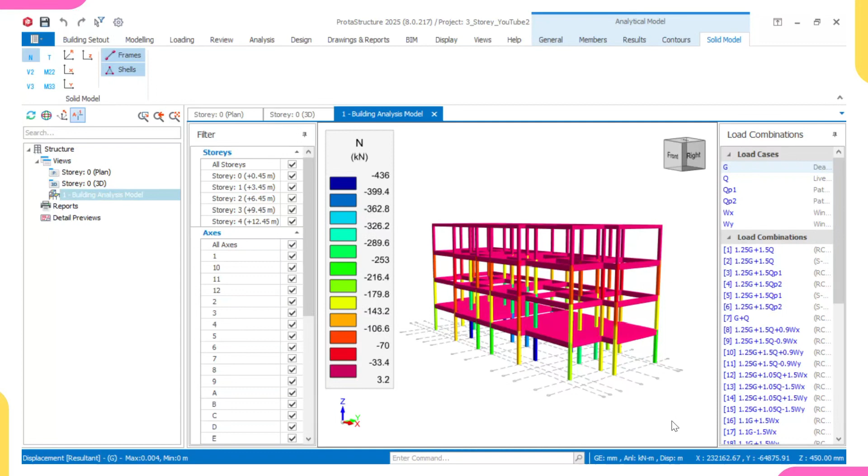When it comes to structural design, one of the most important decisions an engineer must make is the choice of foundation. For this particular three-story residential building, the soil condition was weak, and using pad footing would have meant that the load was not evenly distributed into the soil. That's why I opted for a beam raft foundation, a system designed to spread the load uniformly and ensure safety and stability.

But choosing the right foundation is only the first step. What truly matters is how you detail and position the reinforcements, because beam raft foundation is completely different from conventional superstructure slab. The placement, the arrangement, and even the philosophy behind it must be carefully considered.

In this video, I take you step by step through the complete slab detailing of a beam raft foundation from start to finish. I explain not just what to do, but also why it should be done that way. By the end, you will have a full understanding of how to approach, detail, and execute a beam raft foundation properly. If you ever want clarity on raft foundation reinforcement, this video will give you the professional insight you need.

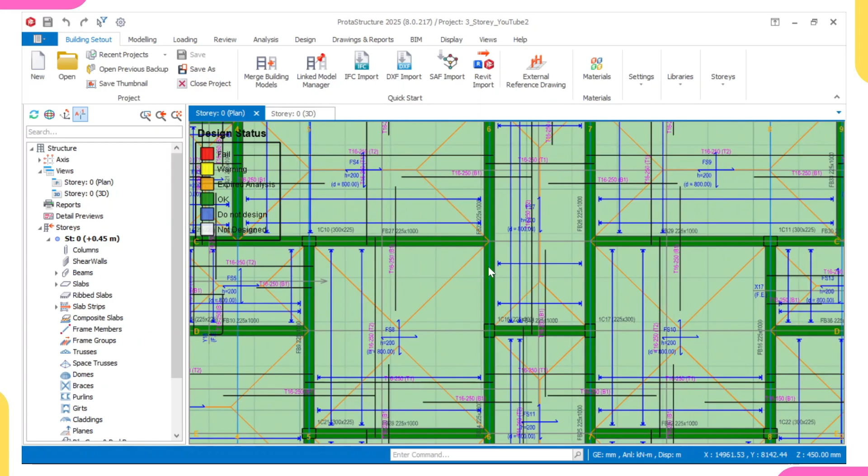So the unique thing about this beam raft foundation: in our normal slab, look at this, we'll be having this as top reinforcement. But if you see in this foundation slab, ProtaStructure is giving it to us as bottom reinforcement. It is correct. Let's also check. Look at this one, it's giving us bottom reinforcement. What we normally have in our conventional slab as bottom reinforcement, we are now having as top reinforcement. Let's check again, see, this top one is now bottom reinforcement once it comes to beam raft foundation.

Let me go over to story one so you can see what I'm explaining. So right now I'm in story one. This is my story one, and if you see, this is my staircase region, that's why the area is void. So look at it, it is on top, T1. Look at it, it is B1, that's bottom. It is T1, top. It is T again, top. Here, it is not B. But once it comes to foundation, it is different.

I will explain the reason for this once I enter detailing proper. Even if you go to beam, it is also like that. In beam, our hogging moment is no longer at the top, but now at the bottom. But I'll still explain all this once we enter detailing.

So right now, let's go over to AutoCAD. Coming over to AutoCAD, this is the foundation detailing that we got from ProtaStructure. But like I've always said, you can't print this and submit it to site. If they work with this, they will really get confused, and they will misinterpret what you have done. And once they misinterpret what you have done, this can result in building collapse, because they will do rubbish on site, because this is not readable. They will not understand this.

So we'll be using a template called Stonebridge detailing template. This template will help us achieve a neat and well detailed drawing. Also, coming over to beam, if you see, you won't even know the difference between our reinforcement and our beam line. But in a normal sense, reinforcement should be thicker. Before, we just come over and make it 0.3. Look at it, it is not thicker.

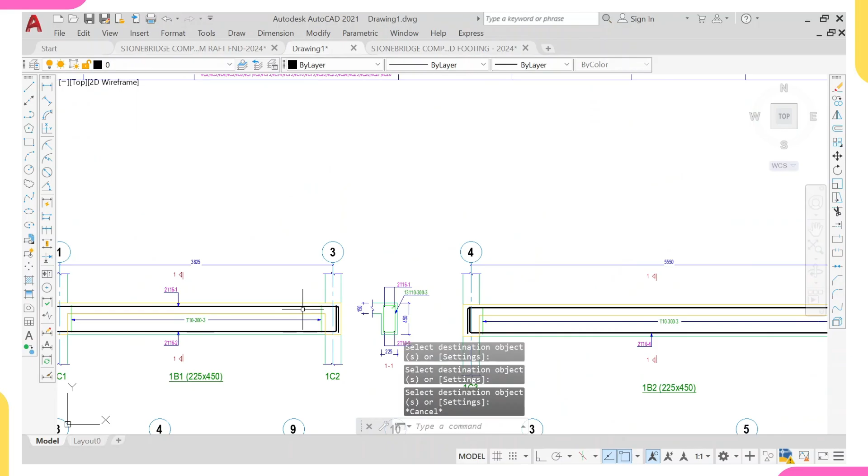Then we'll now do MA, that's to match property, then we'll start matching property. So this is how it has been done before, so that once somebody gets your drawing, it will be readable and clear and neat. But let me do Ctrl Z, that's to undo, because this is not what we'll be doing now.

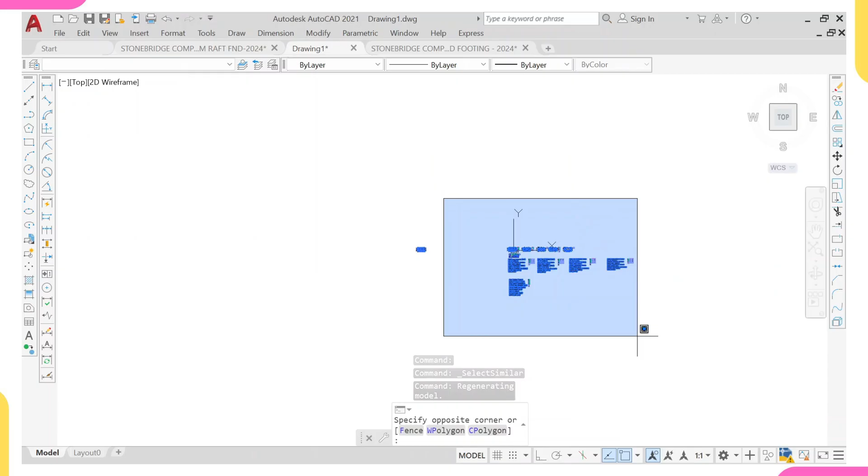So I will now right click and click on select similar. If I click on select similar, you see everything has been selected. But if you zoom out, you see some things are also selected here, so you hold your shift key to deselect these ones - yeah, they have been deselected now. I'll now type E, enter - E is for erase. So now I'm having a neater drawing.

What I'll do is still delete these ones because I don't also need these. So I'll still delete them - I'll also right click on select similar. Yes, I'll right click on select similar.

I think this will be the last thing we'll be deleting. Then I'll zoom out, hold my shift key, and deselect these ones. So right now I'm having a very clean and neat drawing.

So what I'll be doing now is to copy this drawing and paste it into the Stonebridge detailing template. I'll do Control C to copy, then move into this new interface, which is our Stonebridge detailing template that we created in our first video. I'll come over to this point and do Control V to paste it. So this is what I'm having right now.

Then I'll come down to this point and get a sample from this Stonebridge detailing template. That's why I say you should get this template, because you always need it. So I'll do CO, enter, to copy this sample, place it at this point, and then escape.

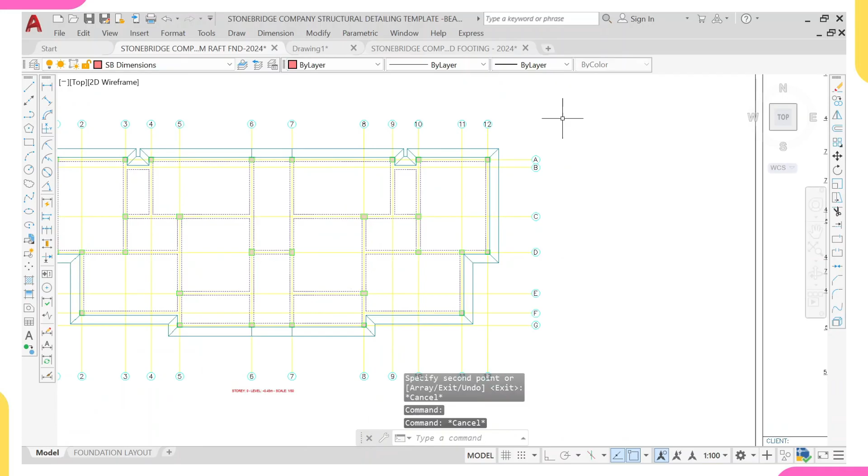So what I will do now is match the properties of everything here to this template. For example, this is our beam line. If you check the layer, it shows beam line by layer, by layer. But if I come over to the Stonebridge detailing template and click on it, it shows NLNG beams, color 8, continuous, and 0.2.

The reason you match the properties of everything here to this is because even if you work with this now and still print it, it won't be readable. For example, this thing is just by layer, there is no line width, so if you print it, it will be faint. But the one Stonebridge gave us has a line width of 0.2, so if you print it, it will be bold.

Let's check the line width of this. If you see this text, it's by layer, meaning the line width is 0. Let's also check the line width of this one, also 0. That means if you print this, it won't be readable. People won't be able to understand your drawing. That's why we're advising you to get this Stonebridge detailing template, because everything has been done automatically.

So I'll try to match the properties of everything here to this. I'll come over to beam. What is the property of my beam? If you check, it is NLNG beams, color 8, continuous, and 0.2. So I'll come to this point, click on it, right click, then click on select similar, and then come over to change the layer.

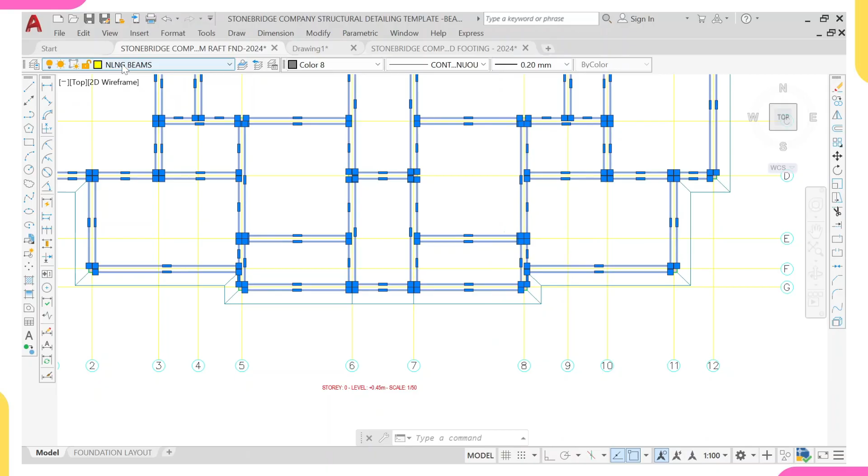So I'll move over to N. Look at it here, we go up. Remember, we said it is in color 8, color 8. Then here it is continuous, you click on continuous. And here it is 0.2. This is it. You must not just change only this layer, change these ones too. I'll escape.

So this is what I'm having now, it's now looking like this. Then I'll come over to this cantilever slab and check the layer. It is in NLNG concrete slab, and it is by layer, then 0.18. I'll escape and then come over and click on this.

I'll right click, select similar, then click on this to change the layer, that's NLNG. We need to go up. Look at it, NLNG concrete slab. Here we have it as by layer, and here also by layer, but here we have it as 0.18. Please make sure you change this to 0.18, because if you don't, it will be faint when printed.

So another thing to notice is that toe slab that we included in ProtaStructure to counter overburden pressure.

If you have not watched the design video, go and watch it so you understand the reason behind this toe slab. It was to counter the overburden pressure. Once the load comes to this column, we spread its load around this slab, and then this slab will distribute the load coming to the soil evenly, using this high surface area.

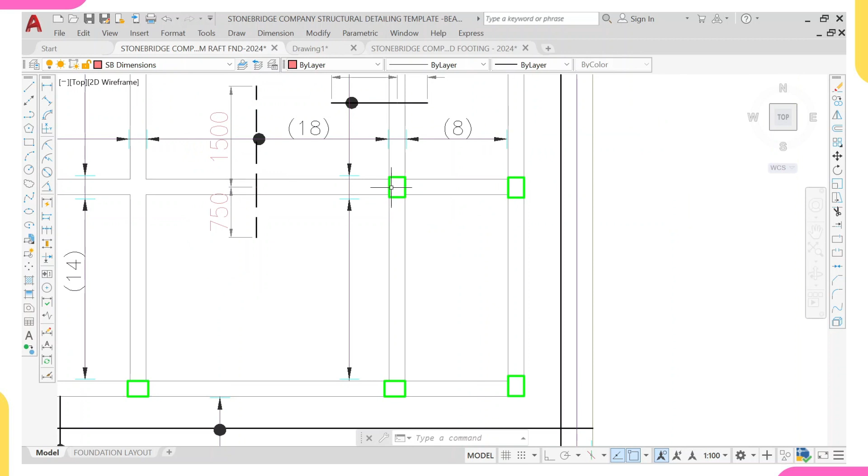But coming to this point, these perimeter columns will only spread their load to this slab in this direction. So if you check the surface area where they are spreading their load, it's not much, meaning the load will not really be spread evenly. That means we'll be having a very high punch here. So to counter that high punch, we will now introduce this toe slab.

This is just a hint of what I explained in that design video. If you want to know more about it, go and watch the video where I did the design of this beam and slab foundation, because I explained it there very well. The load coming to this need to be spread evenly, that's why we included this toe slab. If you don't, the load won't spread evenly, and if you design it that way, it will surely fail around these perimeter columns. Why? Because the load is not being spread evenly. You can go and watch the video to learn more.

So what I wanted to show is that all these cantilever lines are not here. So I will be deleting them one after the other, coming to delete and delete and delete. I'll pause this video and delete everything fast, so I won't waste time.

Right now, everything has been deleted, so you're no longer seeing those cantilever lines. The next thing is that there is no grid line here, because I did not use grid lines here. So I'll come and delete all my grid lines, so I'll have space while doing my detailing. That's the reason why this grid line was being deleted, so there will be space while doing my detailing. So I will delete this.

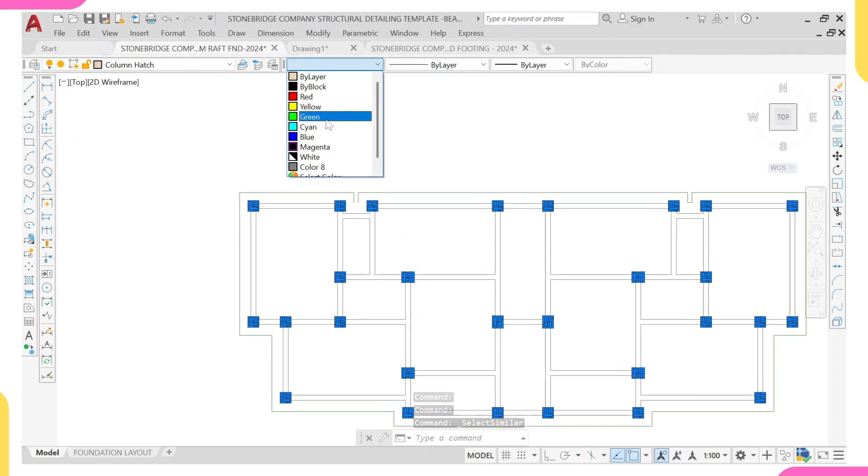After this stage, next thing is that these column colors are blue in color. So what I'll do is come over here, click on this, click on select similar. Once everything has been selected, I'll click on green, select this green color, so they will be green in color. Let me escape, I made a mistake. Let me copy this, CO, enter. Let me copy this and place it here.

I mistakenly deleted it. So next thing we'll be doing now is to start our detailing proper, because everything is done here. I want to explain that thing I told you in ProtaStructure, that we will be always having our top reinforcement converted to a bottom reinforcement. Let me explain it.

I would like to explain using a diagram. Let me go and import that diagram and explain using this. So this is my slab, then this is my beam, this is my beam, this is my beam. It's just like this is one of the slab details that I have done.

In a normal slab, we used to have top reinforcement. Look at it, this is the top reinforcement, and this is the top reinforcement, that's in a normal slab. Our top reinforcement looks like this, because the bending moment in a normal slab will go like this.

It will go like this. Then here it will go up, come down, go up, come down. So for that moment, we used to provide this top reinforcement to counter those moments.

But look at, this is a foundation beam. If you can see, this is our beam depth, and this is our beam depth. And if you see, it has changed. At here, we're having it to be at the top. Then we're having a bottom bar, which is our main reinforcement throughout the whole slab.

Why, if you come to this foundation beam, look at how it looks. This top bar is running throughout the whole slab. Why we are now having this bottom bars to counter the moment. In this case, look at how the moment is, and the moment it will go up. Once you go up, it comes down and you go up again. So this moment coming down here, don't worry, let me explain it.

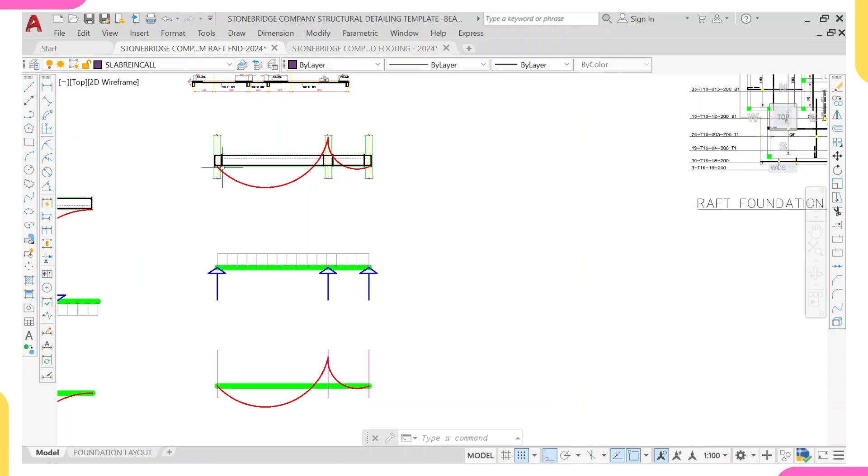So look at this is the free body diagram. So from here now, I can say that I'm having load acting on top of this slab. So look at, these are the loads. These are the loads. Then these are my beams. This is my beam, this is my beam, this is my beam. So this beam now is acting as a support, and also as a support.

Remember, if once this UDL, that's uniform distribution load, is acting on this beam, the bending moment diagram will look like this. Yeah, this is just normal bending moment diagram. Once you're having this, the bending moment will start from 0, then it will now go up. You are having hogging moment, then sagging moment, then it will now terminate at 0.

Then if we are now providing reinforcement, we will provide our main reinforcement at the bottom. Yes, we'll provide our main reinforcement at the bottom. Then we'll now provide top reinforcement to counter this moment. That's the top reinforcement you are seeing here. We now provide top reinforcement. That's this top reinforcement you are seeing here. And also that's this top reinforcement you are seeing here. So we now provide top reinforcement to counter this moment.

And then bottom reinforcement. Remember, just this top reinforcement will only occur at the point where you are having your beam. Yeah, it will only occur at the point where you are having your beam. So for that reason, that's why we do only place this top reinforcement in our beam zones. Look at it, in our beam zones, yeah.

But bottom reinforcement, it's just only here that bottom reinforcement will not be really needed. But if you look at it, it will be very small. So for that reason, that's why we now decide to place our reinforcement throughout the whole bottom slab.

That's why you used to have something like this, but then turn over to the foundation beam. Hope you understand this: our live load is acting downwards. This is our beam, these are our supports, and this is how our bending moment diagram will look like.

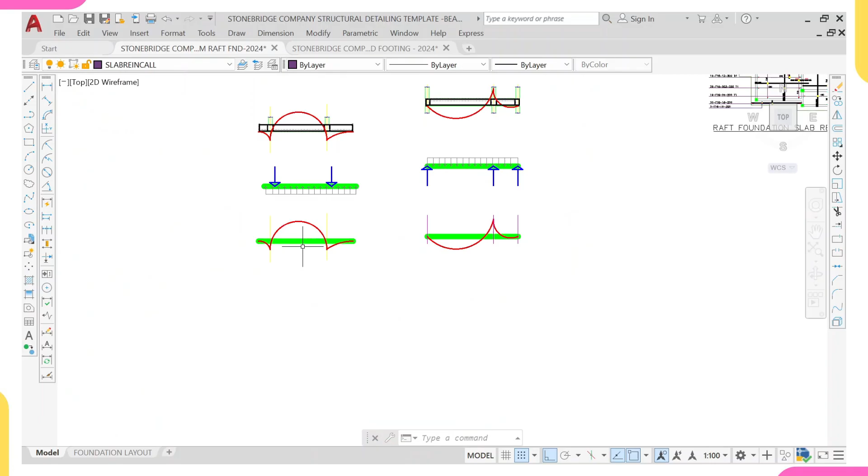Then coming over to our foundation. So this is our foundation, and this is our foundation. This is my column, this is also my column. Then this is now my slab, this is now my slab.

So this column now is acting downwards, this column is acting downwards. That's why you are seeing this, like load transfer in the column.

The beams, the floor, the slab will transfer its load to the beam. Then the beam will transfer to the column. The column will transfer to the foundation. Then the foundation will transfer to the soil. So look at it, the load is transferring to this foundation slab. This column now is transferring its load to this foundation slab.

So if you see now, it will punch here. This is why we are having this moment here, because it will cause something like a punch here and also a punch here. Then don't forget, we are having soil beneath here, we are having soil here.

So this soil now, look at it here, is acting as our UDL. This soil is acting as our UDL, and this soil now tends to oppose the load coming from this column, thereby pulling this slab upward. Look at it, it will pull it upward. Then once it tries to pull it upward, we'll now be having moment at the top.

We'll now be having moment at the top. In the case of a normal slab, our load, which is live load—that's human beings and all these things—they are acting downwards. While in terms of foundation, the soil is acting upward. So the soil, look at this slab, the soil will tend to pull it up. Yeah, not tend to—the soil will pull it up.

Then why will the column now cause a punch here, a punch here? Remember, in this one it is our beam that is pulling this thing up, pulling this up, and that's why we are having this hogging moment here. But in this case, the column is pulling it downwards, and then our soil will now pull here, up.

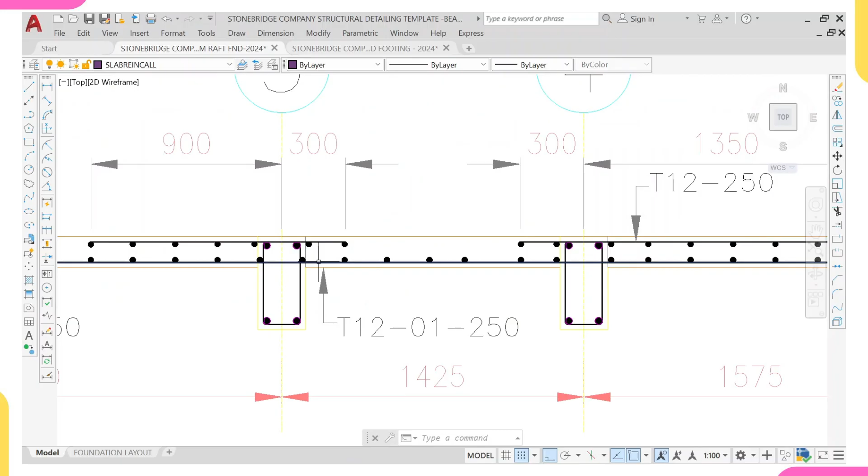For example, if I'm having this here now, it's just the same thing—just interchange these two things once it comes to the foundation slab. Just interchange both of them for the foundation slab, because of this change in moment.

I hope you understood this, as I explained. The soil is acting upward, then our column is pulling our load downward. So for that reason, this is how our bending moment diagram will look like. The soil will try to pull the load upward, while the column will try to pull this slab downward.

That means here we'll be having moment, so we'll provide bottom reinforcement to counter this moment, and also our main reinforcement, which will now run throughout the whole slab, the top reinforcement. I hope you have understood this.

But before I continue, I would like to say something—there's one mistake I made during the course of this video. I could have started from the beginning, but it would be time consuming, so I decided to leave it like this, but make the correction before I reach the point where I made that error.

So the correction I want to make is that, based on what I have explained now, this will now be our top reinforcement. This top reinforcement will be running across the whole slab.

So you know that in normal slab, which is superstructure, we used to call these B1, B2, bottom reinforcement. But this is a foundation slab, so it has changed. It won't be called B1 again, it will be called T1. Let me trace this one. If you trace it, look at it, it is T1. That's this reinforcement. And if you trace this reinforcement, it will be T2, meaning it is top reinforcement.

But during the course of this video, due to the fact I've done a lot of slab design for superstructure, I was calling this B2, B1. During the course of this video, I just want to correct it right now. So if I start making that mistake, you know that is a mistake.

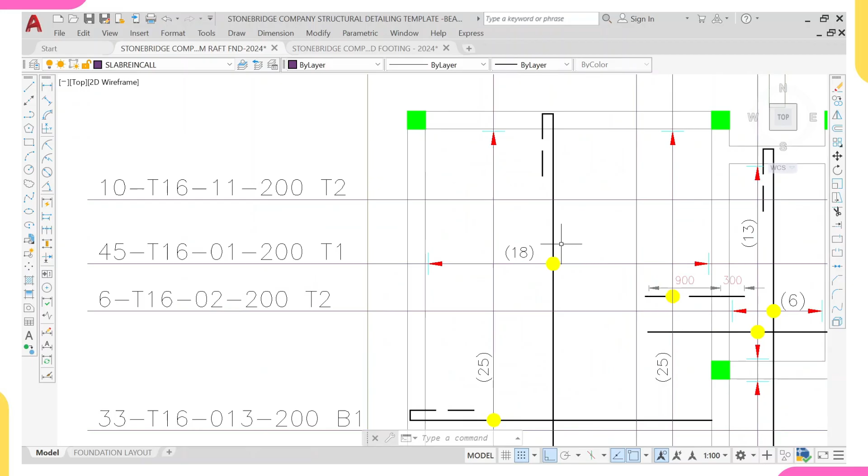Like I called this, look at this, I've detailed everything here. This is how it looks, let me show you. This is what you get by the end of this video. This is what you'll be able to achieve by the end of this video, because I've done this whole thing. This is what you're going to learn by the end of this video, how to start from this and arrive at this.

I just want to show you one mistake I made. For example, this now will be T1, but in a normal superstructure slab we call this B1 or B2, but in foundation we call it T. Yes, T. Look at it, T. Let's check it. Look at it, T. Yeah, T. I've done the correction. It's just that during the course of the video, I'll be calling it B1, B2, so you know that it is a mistake.

The reason is because of this thing I've explained. Look at it, there is an interchange. At this point, this bottom reinforcement ran through this whole slab, but coming over to this point, it is the top reinforcement that ran through the whole slab. So that's why this thing is like this. Coming over to this point, this thing now is my T, no longer B. In foundation, it is T, not B. Please understand this.

Another thing I would like to explain is this. You know, during the course of the video, I was calling it lapping length. Yes, it is called lapping length, but normally this is called bottom bar. Bottom bar. Let me show you the meaning of this.

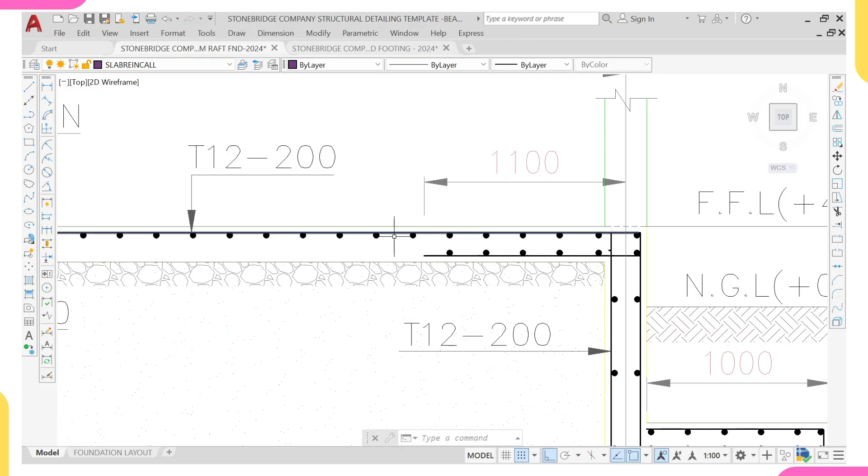Let me come and show you. Look at it here, is this the thing that we're having here? Look at it, have you seen it? Look at it here, is this? Then it will now come and curve like this. That's this. Yes, that's this, look at it. Is this bar? Look at it here. But I kept on calling it wrapping length so that you know what it means.

So look at this bar now. If you are seeing this, this is the top reinforcement, top reinforcement. Then this is my sidebar. Then this is my bottom reinforcement. Now come over to the section and look at how it looks. Top reinforcement, top reinforcement. Then I will be having a sidebar here. Then this is that bottom reinforcement, which you can also call wrapping length or bottom reinforcement. Just call it bottom reinforcement.

That's it. So with this now, let's continue with this video. I believe you understood what I just explained. So right now, I'll start my detailing.

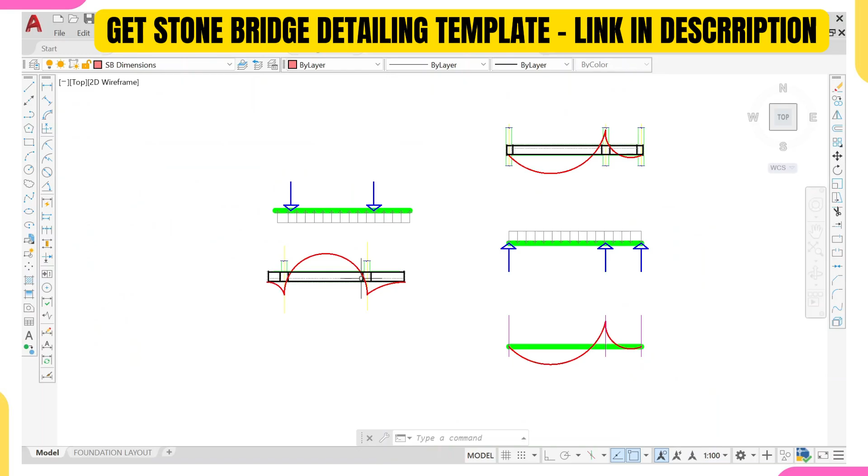As you can see, all these main bars, as in normal reinforcement for superstructure, all my bottom bars in this foundation beam will now be top bars because of what I've just explained. Because of the way the load is being transferred, the soil is trying to resist the load, so that's why we are having this. Once it comes to foundation, you'll see that my main reinforcement will be at the top. You will surely see top reinforcement throughout, it must be there. Then this bottom reinforcement will not be like the top reinforcement in superstructure. I don't know whether you understand what I just said, but let's go over to design.

So once it comes to detailing, you can detail by panel. Someone can decide to detail panel by panel, finishing one panel, then the next, and the next. Or you can just decide to detail everything at once. In the last video I did about detailing, I did it panel by panel, but in this video I'm no longer doing panel by panel, I'll just do everything at once. In case you want to learn how to do panel by panel, I've done a video on that.

So right now I want my reinforcement. I'll type L, enter, and turn on my ortho. I come over to this point and click, or I'll do Control F8. Once you do Control F8, your ortho will automatically turn on. So I'll do L, enter.

So I'll be having my main reinforcement run from here to here. Remember, we are not including here because this is a toe slab. Look at the way it looks like.

Let's go to the section we did in our last video. Look at this, the way it looks like - this thing is at the bottom, so we are not detailing it now. We are only detailing this top one. We will not detail this toe slab, these outer ones - they are called toe slab.

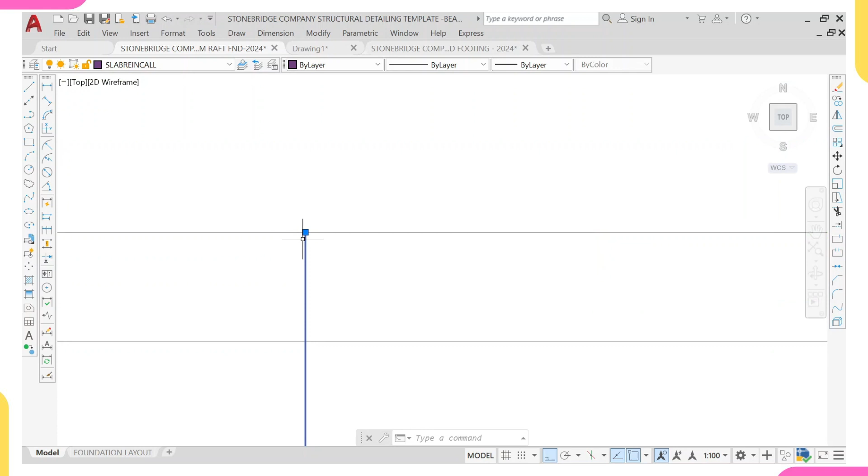So once I have this, remember my concrete cover - all that I have as my concrete cover. I used 35 as my concrete cover in slab detailing. So I use 35, then I'll put this thing downward by 35, that's my concrete cover. I'll do enter, then once I've done 35, I will now do L.

I'll come and do L, enter. So what I'll do now is, our slab depth is 200, so I'll do 200 minus my concrete cover which is 35 - this one is for the bottom - minus again 35 for the top one. So I'll now be having 130. I'll do 130, enter.

Once I've done 130, enter, then I'll now include my lap length. So what is my lap length? We are using diameter 16. Don't forget that your lap length is always 50 times the diameter of your rebar. So I'll do 50 times by 16 because we're using 16, so my lap length should be 800. I will just minimize, so I'll do 800, enter.

I will not escape, so this is what I'm having right now. I hope you understand - yes, this is what I'm having right now. So in this case I'll come, that's why I say you should get this template.

I'll come and match property, so I'll do MA enter. I'll come and match property again, this one - I'll escape and come again and match property. I'll match this, this one is my bottom reinforcement. So I'll do MA enter. So my bottom reinforcement should be like this, and this is my top reinforcement.

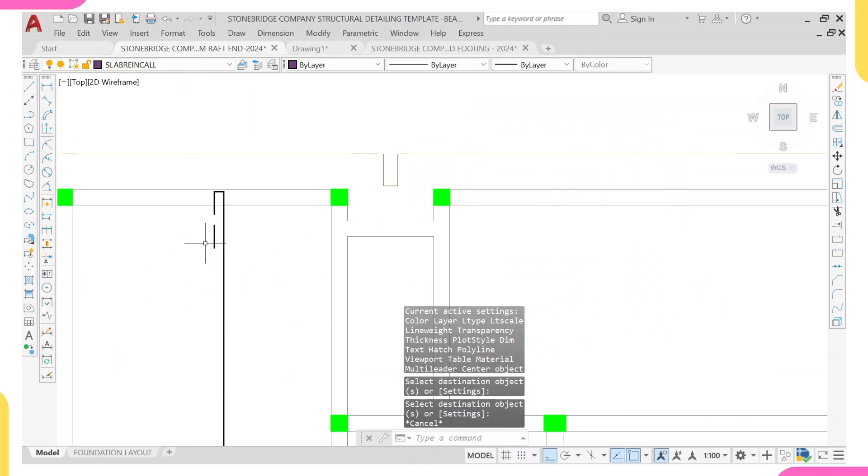This reinforcement, I have it running from here to here and also from here to here. Once it comes over this side, I'll not detail this side. After, I'll mirror whatever I have here to this side because everything is the same, so I won't detail here, I'll just mirror everything I have here to this side.

So this is what I said I'll be having. I'll do L enter to call out my rebar, run it from here, and drop it at this point. I'll escape. Remember our concrete cover, which is 35. I'll click 35 enter, and once I do that, this is what I have here.

Now I'll come over to this Stonebridge detailing template and copy this. I'll do CO enter to copy from this point, zoom out, and come and place it at this point. So I'm having it here.

So I'd like to change the color of this to red. You can decide to use any color of your choice, but I want to use red. I'll also come over and copy the one on this side.

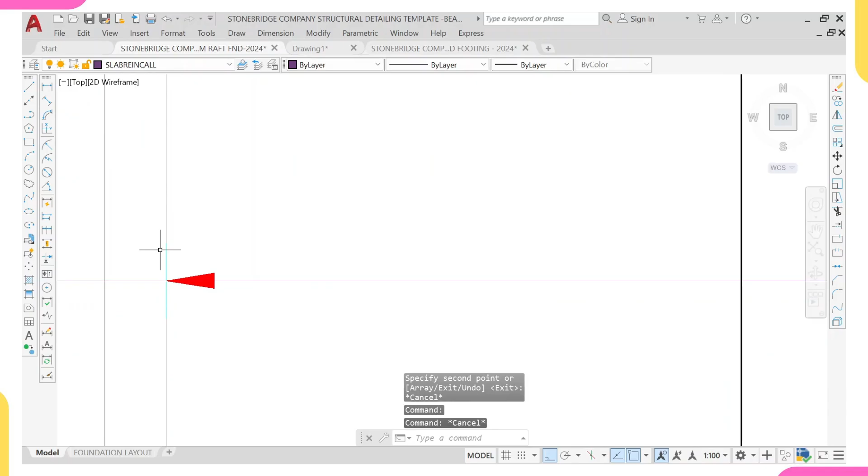I'll do CO enter, copy from here, and place it at this point. Once I place it, I'll also change the color of this to red. So I'm having this. Once I copy to this point, I'll mark this, do enter, and move it backward. That's my concrete cover, 35, enter. So this is what I'm having right now.

Then I'll also come and copy out my call out, which is my indicator. I'll do CO enter to copy my indicator from this point, and come and place it at this point. I'd like to change the color of my indicator to yellow. Yes, this is the color I want. So this is what I'm having right now.

Remember, I said this reinforcement will run from here. Let's copy this. I'll do CO enter, copy from the extreme, and trace it. I'll place it at this point - I forgot to place this one before.

I'll also copy this, do CO enter, copy from this point, and place it at this point. So what I'm having now is that this reinforcement will run from here to here, and also from this point to this point. That's what I'm having.

So I'll come right now and copy this. I'll do CO enter, copy from this point, then come and paste it - one here and also one here. So this is what I'm having right now.

So I'll also come again and copy another thing. I need this. I'll do CO enter, copy from this point, move it backwards, and paste it at this point. So this is what I'm having right now.

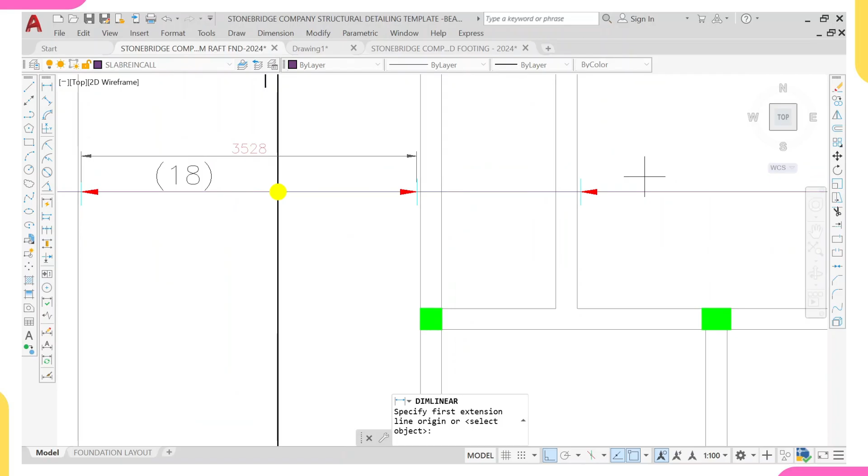Then at this point, next thing to do is get the number of reinforcement running from here to here. To get that, we need to know the dimension - what is the distance from this point to this point? I'll right click again, repeat linear, to get that distance. So I'll come and click on my calculator.

Before I click on my calculator, how are we going to get the number of reinforcement running from here to here? You do 3528 divided by the number of your spacing - you divide it by the spacing of your reinforcement.

So let's go and see what ProtaStructure gave us as our spacing. I'll come over to this drawing that ProtaStructure gave us and zoom here. We're having TY16 at 250. So the spacing that ProtaStructure provided for us is 250, but I will not be using this 250.

The reason I will not be using this is I'll be using the spacing of 200. This is because I'm in an African country, and I know that the country I'm located in, which is Nigeria, tampers with quality a lot.

Remember we use T16. Their T16 now will be something like T15, T14, or even T13, so it's not enough. Also, we use the yield strength of 460, and the reinforcement that I will buy from the market might no longer be the yield strength of 460. It might just be something like 430 or even 420. So to counter these losses, I will decrease the spacing to 200. In fact, the general advice I'll give anybody is that once it comes to slab detailing, please use 200 millimeter spacing at least.

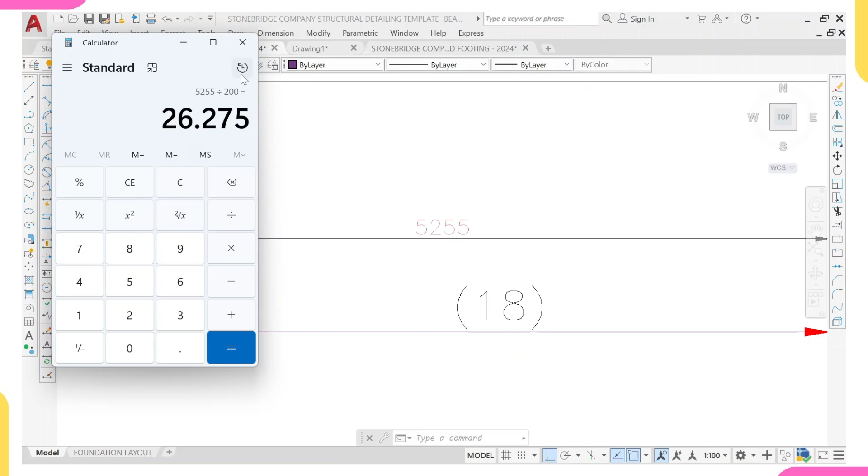Coming over to this point, I'll come over to my calculator again. I'm having 5255 divided by 200, so this is what I'm having, 26.27, so it will be 27. After this I'm not bringing on my calculator, I'll just be using the one I have here, you can press it in your own calculator. So I'll be having 27, I'll change this into 27. I hope you are following, I'll change it to 27. So this is what I'm having right now.

Coming over to this point, what I'll do now is 27 plus 18. So 27 plus 18 is 45. You can press it in your own calculator and check. So it's 45, I'll do 45.

This is not T12, it's T16. At T16, since this is my first bar, my bar mark will be 01. That's my first bar mark. This is 200, then this is B, B stands for bottom. I can start to use B1, anyone, B1 or B2. Once I come to my verticals it will be B1, then my horizontals will be B2. So that's what I want to do now. I don't want to include one way or two way slab.

So I'll come and click outside. Yes, so this is what I'm having right now. Then I've detailed this and this.

Next is that I'll copy this, next is for this one. But what I'll do is I'll just come over and copy this, copy this, and do CO, enter. I'll copy from the extreme from this point, then once I copy from this point, I'll just come and paste it at this point. Yes, so this is what I'm having.

But what I'll now do is take this thing backward, so it will just run from that place to this place. So I'll now create another reinforcement, L, enter. This one will be running from here. Okay, let me just extend it out first. So this will be running from this point to this point, that this bar will just run from here to here.

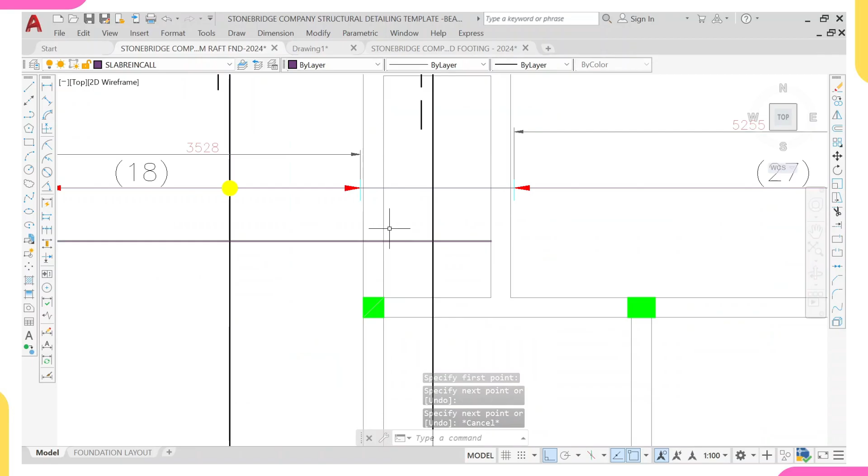So I'll come select this, CO, enter. I'll copy from this point and then place it at this point. Then escape, then do TR, enter, I'll trim off this. Yes, and then I'll come back again and copy this, do CO, enter, I'll copy it from this point. Once I copy from this point, I'll come and paste it at this point. Yeah, so this is what I'm having.

I'll come and copy this, the CO, enter. I'll copy this from here and then paste it at this point. Since this is big, I can just decide to scale it down a little bit.

Okay, let's just check the number of bars. So I'll click on my dimension. What is the number of bars running from here to here? I'm having it to be 1130, so I did 1130 divided by 200, and I'll be having 5.65. That means I'll be using 6, it will not be 6... so I'll do 6, yeah, 6. Then I'd like to delete all these dimensions because I don't need them again.

I'll do E, enter, since I don't need them again. Then I'll scale this down. I'll do SC to scale down, enter, select my base point, and scale it down by 0.75. Enter, so this is what I'm having right now.

Then I'll move it a little bit to this point. I also scale, but let me leave this one like this. So at this point, after this, I've gotten this.

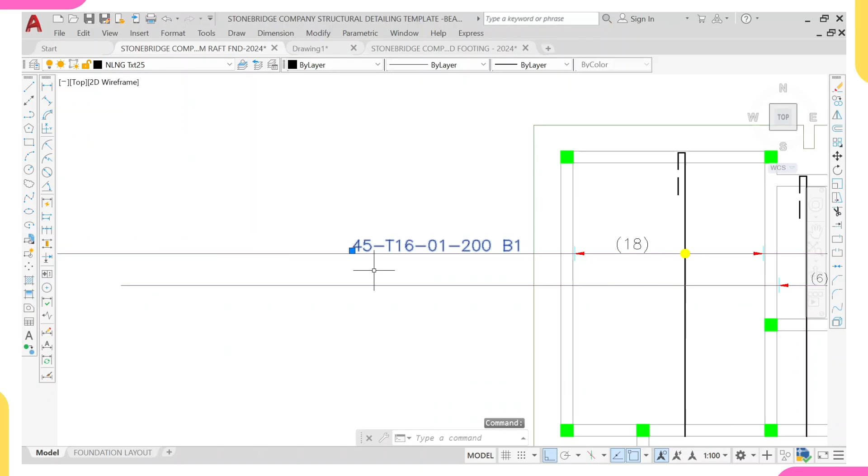What I'll do again is copy this. I'll do CO, enter, copy it from this point and place it at this point. Then I'll double click on this. I'm having 6, just 6, T16. This will be 02 at 200, B1 again, 1. So this is what I'm having right now.

So after this, remember I've detailed here, I've also detailed here, and I've detailed here. So the next thing is to detail this bottom part.

I'll do L, enter. I'll run it from here to here. Remember, you stop here because this is a toe slab. So I'll come and click on this, then take it back by 35, that's my concrete cover.

L, enter, that's my line. Take it back by 130, you can remember how we got 130. Enter, then take it back by 800, I hope you remember how we got 800. Enter, so this is what I'm having right now.

I'll then come and match property. I'll do MA, enter, to match my property. So this is what I'm having right now.

I'll escape again and come match this top reinforcement property. Sorry, not CO, MA enter, that's to match property. So I'll come over and match this property. So right now I'm having this.

This will run from here to here. So I'll do L, enter, starting from this point, and take it outwards. Escape.

So I'll try to bring this a little bit downwards. Yeah, I'll try to bring it a little bit downwards, so I'll try to have it here.

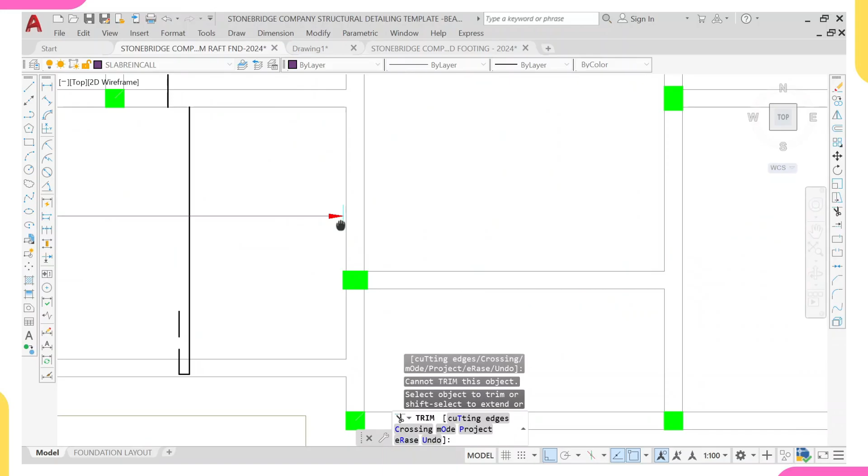Then I also like to come again and copy this. CO, enter. I'll copy this from this point, then come and paste it at this point.

Then right now I'll copy this again. CO, enter. I'll copy from here and paste it at this point.

Yes, I'm having this. Don't forget, I forgot to include our indicator. CO, enter. We'll copy this indicator from this point and include it at this point. I'll also come and include this indicator at this point, and then we'll check.

Okay, remember there's what is called lapping length, because these two reinforcements need to lap. Once this runs from here to here, it will lap with this, while once you come over from this point to this point, it will not lap with this. Then from this point to this point, it will not lap again. So right now, to include this, we must include the lapping length.

So lapping length, remember, we say it is 50 times the diameter, which is 50D. And our D here is 16, so 50D is 800. To include that, my lapping length, I'll do 800, enter. So at this point, once this laps with this, then once it's at this area, it will now come and lap with this. So this is what I'm having right now.

So I'll check the dimension to know what will be the number of reinforcement that will run through here. I'll check from here to here, so I'm having it to be 5103 divided by 200, which gives 25.5, so that will now be 26.

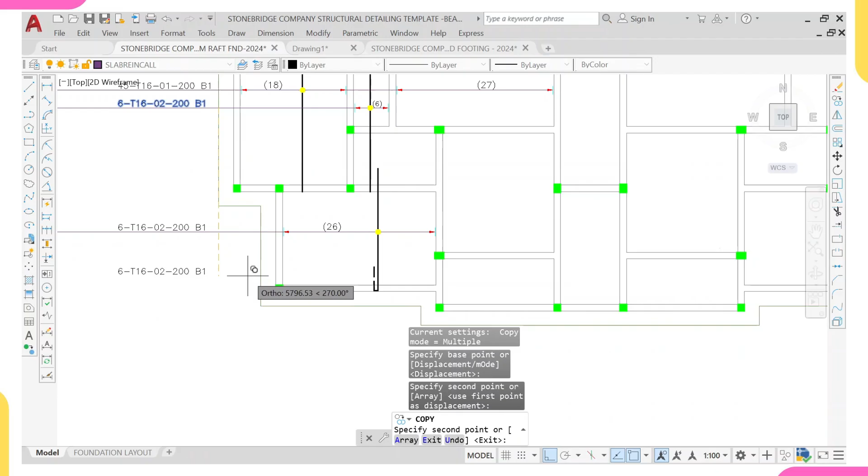So I'll come and double click on this, 26. So I'll delete 26. T16, this will now be 03, and this will be 200 B1. So it's okay with me.

Coming over, my next reinforcement will run from here downwards. So what I'll do is I'll come over and copy this. Do CO enter. I'll copy this and place it at this point. Then I'll highlight this and extend it downward to this point.

Then I will take it back 35, my concrete cover, enter. Then I'll escape, L, enter, to include my side bar, which is 130 millimeter, enter. Then I'll include my lapping length, which is 800, which is also serving as bottom bar.

So I'll click enter, then come and match property, MA, enter. Once I have MA, enter, I'll match this property with this. Then I'll escape, MA, enter, and match this property with this.

Then I will now L, enter. This will run from here to here. So I'll indicate that it's running from this point to this point, using this area. So I'll pick my indicator, CO, enter.

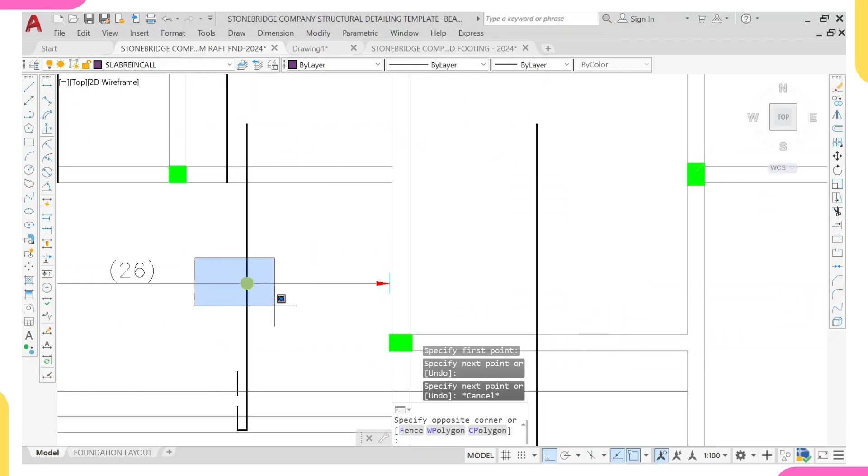My indicator, I'm having this as my indicator. I'll place it at this point. Remember, we're having a concrete cover of 35, so I'll take it back by 35, enter. Yes, this is what I'm having.

I'll come over to this point and select, CO, enter. I'll select this, copy it, and then place it at this point. Then next, I'll come and copy this, CO, enter. I'll copy this from this point and place it at this point. Yes, this is what I'm having right now.

Then I'll come and copy my rebar at this point to know the number of reinforcement running through here. I'll place it at this point. I'll escape, then click on my dimension to find out the number of reinforcements running from this point to this point. So I'm having it to be 3682.

So I'll escape, 3682 divided by 200, so I'm having 18.4, which will now be 19. You can press it in your calculator to verify 18.4. So I'll now be using 19.

Then I'll come over and copy this. I'll do CO, enter. I'll come over and copy this and place it at this point. Then remember, it's 19.

I'll double click on this. Yes, I'm having 19, T16. This will now be 04, 200 B1. So I'm okay.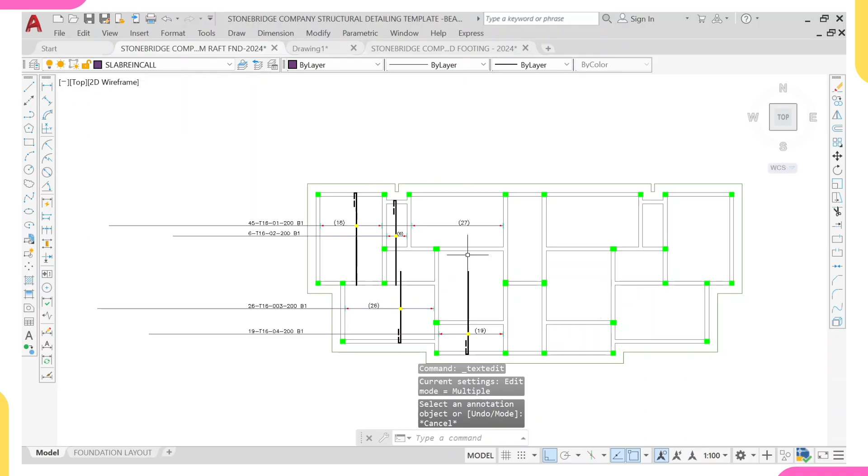If you can see, I've provided all my vertical bars. Next thing is to provide these bars, that's the horizontal bars. Yes, that will be the horizontal bars, and the horizontal bars will now be my T2.

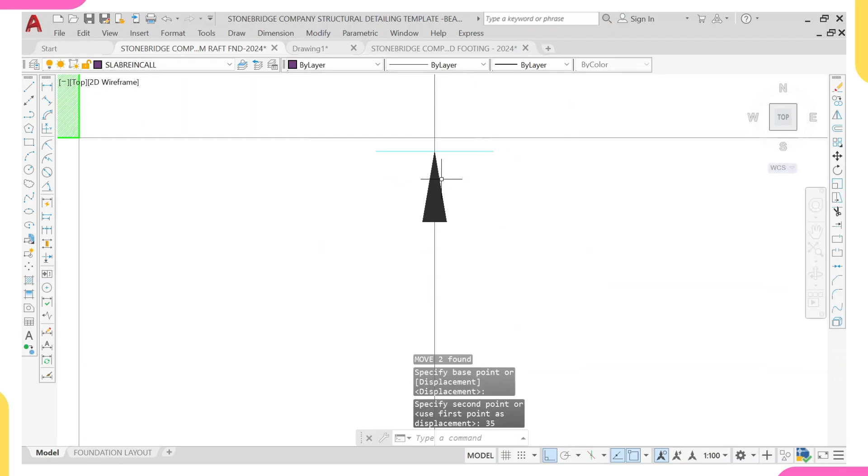That's to move it downward by 35, my concrete cover. So this is what I'm having right now. Then I'll copy this indicator, CO, enter, to copy this my indicator.

I'll copy this my indicator and place it at this point. Sorry, I don't copy this from the center. M, enter, so I'll place it at the center. So this is what I'm having right now.

I'll try to move this a little bit, move it away from this line. So I'll place it here. So this is what I'm having.

So let me come and pick up this from here. I'll do CO, enter. I'll copy from this point and come and place it at this, I'll like to place it here.

So I'll now check the number of reinforcement running from this point to this point. I'll come and click on my dimension, checking what's the dimension from this point to this point.

Let's zoom. I'm having it to be 4956. So I'm having it to be 4956 divided by 200, so I'm having it to be 25. I'll escape, I'm having it to be 25.

So I'll double click on this. I'm having it to be 25. So this is what I'm having it to be.

Then next thing, I forgot to change the color of this. Okay, let me just select it, and then I'll come over and change the color to red. Yes, this is what I want the color to look like.

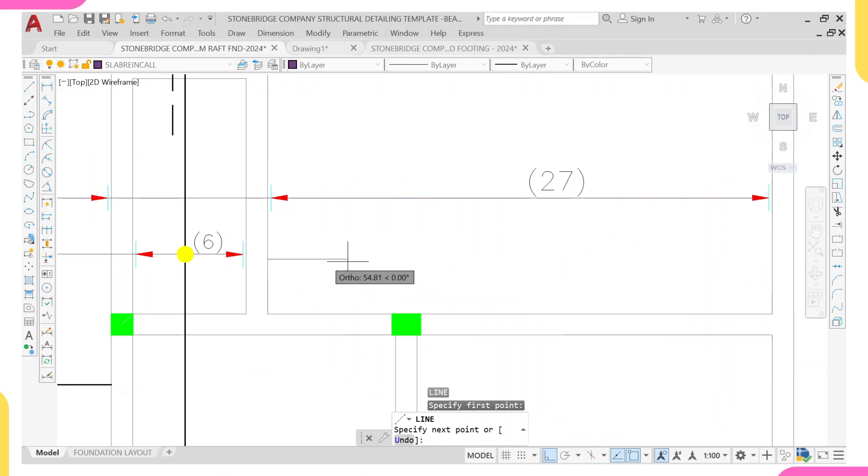So right now I'm through with this. Then I'd like another reinforcement to run like this. I'll do L, enter, I'd like to have another reinforcement running from this point to this point. Let me drop it at this point.

Remember, here is a slab, because this is foundation. So I'd like to have a reinforcement running from here to here, and I'd like that reinforcement to move into this slab.

That will be the lapping length, the lapping length of any reinforcement I will provide here. So I'd like to move by 800, which is the lapping length. I'll click on enter. Control Z.

So I'll click on this again. I'll extend it by 800, which will be my lapping length. I'll click on enter. So this is what I'm having.

I'll come and match property. I'll match property MA, enter. I'll match this property. So this reinforcement now, I'd like it to be running from, I'll type here, enter.

So it will be running from this point, running from this point upward. So I'll escape. I'll come and copy this.

I'll copy this, do CO, enter. I will trace this line downward. So I'll copy it from here and then come and place it at this point.

So I'll now do TR, enter, which is to trim out this. So I'll trim out this. So this is what I'm having right now.

I'll also come and copy this top one. I'll copy this top and do CO, enter. I'll copy from this point.

I'll copy and paste it here. I also forgot, I'll paste another one here. This one I should have pasted. So I'll copy this again, from here. Do CO, enter. Do CO, enter.

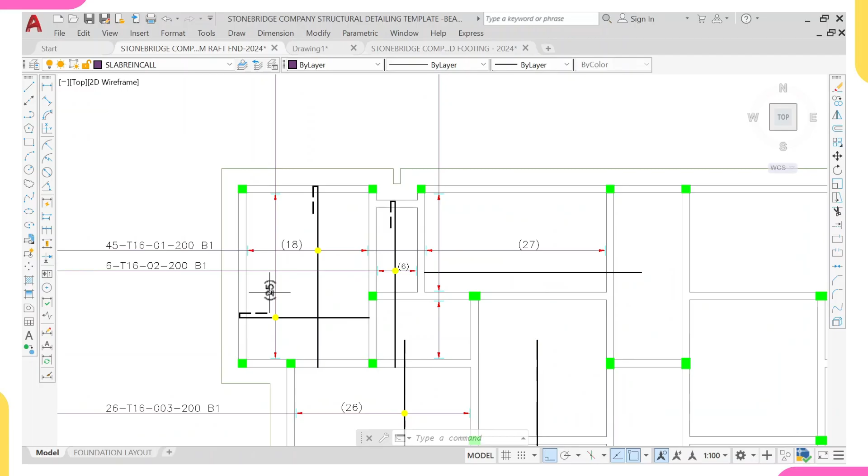I'll do CO, enter. I'll copy this from here and I would like to paste it at this point, and also at this point. Yeah, this is what I'm having. So I'll now check the dimension to know the length.

So I'm having that from this point to this point, from this point to this point, it's 1724. Then 1724. I'm having that from here to here is 2929. So I'll use my calculator, 2929 divided by 200.

So I'm having 14.6, so I'll be using 15. Yes, I will delete 15. So this is what I'm having.

Here it will be 1724. 1724 divided by 200, so I'm having it to be 8.6. That means we'll be using 9. So I'll delete 9.

So I'll come over. Since I don't need the dimensions again, I'll delete them and also delete them. Enter. So I'll come over to this point and copy one of this.

Yes, I'll come and copy one of this. CO, enter. I'll copy from this point and then I'll paste it at this point. Yes, at this point. I don't even call out this.

So I'm having this. So in this case, this one is what? 25. 25. So I'll double click on this. It is 25. I'll double click on this. I'm having it to be 25.

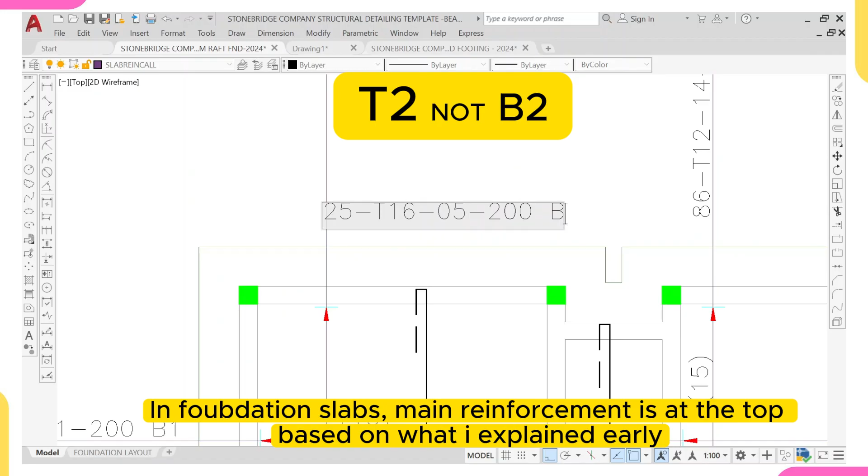T16. So what is my number? Oh, the last one I did was 4. So this will be 05, that's 0505. And this is 200. This will be my T2. Yes, T2. So this is what I'm having.

And then I'll come over to this one. So I'm having it to be 15 plus 9, which will give us 24. So I'm having it to be 24, T16, 06, 06, that's the bar mark, and this will be 2. So this is what I'm having right now.

Then remember I said another bar will run from here to here. Another bar will run here. I'll do L, enter, and indicate this bar. There will be a bar here from here to here.

Let me match the property. MA, enter. I'll click on this. Yes, the reason why this one does not start from here is because of this offset here. Yeah, it's because of this offset. That's why this one - if you remove this offset, I will just run this bar throughout.

I'll run it and stop here. But because of this offset, that's why I couldn't. So right now, I'll take this thing to this point and then include my lapping length of 800 millimeter. The lapping length, that's 50 times diameter. Yeah, I've explained it before.

Then come over to this point and also include, I'll drop it at this point. Then I'll click again, include my lapping length, 800 millimeter. I'll click on enter. So this is how this bar will look like.

Then remember this bar and this bar, they will run from here to here. So I'll just copy these things, I'll copy the properties of this bar. Yes, because they will be almost the same thing.

So I'll also copy this and then also copy this. I'll do CO, enter, CO, enter. I'll move this to this point. I'll like to place it at - okay, let me shift a little bit at this point. So yeah, this one I'm having right now. Then what I'll do is that for this one, I'll take it downward.

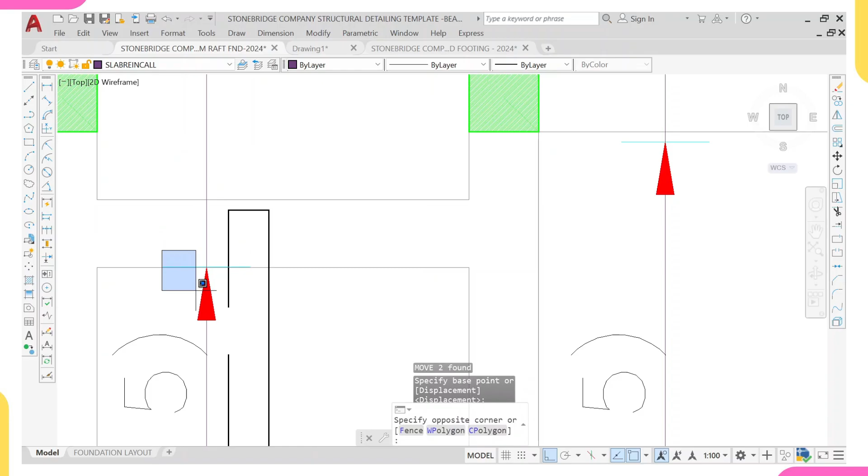I'll do enter, and bring it downward to this point. But don't forget our lapping length. Actually, not the lapping, I mean our concrete cover, which is 35.

At this point, I'd like to scale it down a little bit because it will not be big. I'll scale it down from here by 0.8. Enter, so it will be smaller. Then I'll move it downward a little bit and drop it at this point.

So this is what I'm currently having. At this point, I'll do TR, enter, to trim off this. So this is what I'm currently having, but remember here will not be 15.

Let's check what here will be. I'll click on dimension. I'm having that from here to here is 2550. 2550 divided by 200, so I'm having it to be 12.75. Definitely it will be 13, so we'll change it to 13. I'll click outside.

So this is what I'm having now. Right now we have successfully dimensioned. We are still providing reinforcement for here and also this one. So next will be for this slab and then this slab.

I'll do L, enter. What I'll do is I'll pause this video and do for here and here in order to save time.

As you can see, we're already through with this. Look at what we have done, we're already through with this. So the next thing we'll be doing, I got to notice something.

I did not explain about one-way slab and two-way slab. One-way slab is when your LY over LX is greater than 2, that means it will be a one-way slab. But if it is less than 2, that means it is a two-way slab.

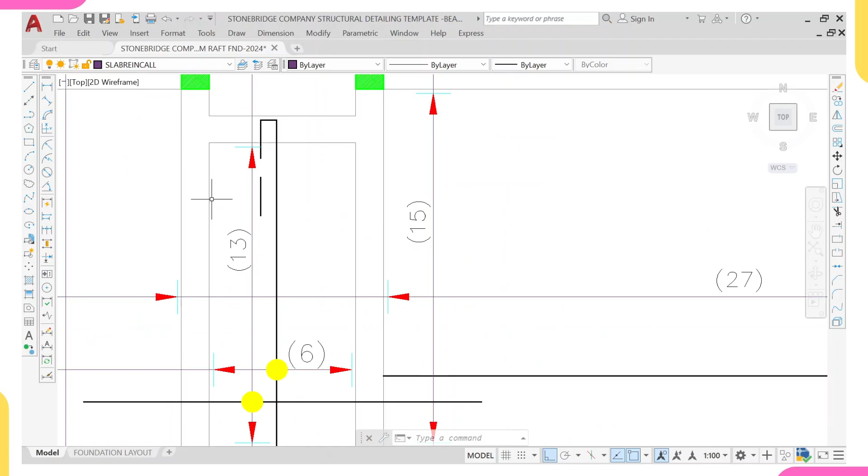A one-way slab will only reinforce the shorter span. Then this horizontal one will now be called a distribution bar, because the moment is really acting in this shorter length. So our main reinforcement, this is our main reinforcement, coming to one-way slab.

But if it comes to a two-way slab, both this and this are our main reinforcement, because moment is acting both in the Y direction and in the S direction. But in this one-way slab, moment is acting only in the shorter span, in the S direction. So for that reason, this is our main bar.

Why is this the distribution bar? That is for one-way slab, if LY over LX is greater than 2. So let's check and know whether this is a one-way slab, because this is what I got to notice now.

First, let's check dimension. I'll click on the dimension, so I'm having this as my dimension. From here to here, this is 1200. I'll right click again, then check from this point to this point.

So I'm having 2550. I'll come to my calculator, do 2550 divided by 1200, so I'm having 2.12. If you can see, this is a one-way slab because the ratio of my LY over LX is greater than 2.

That means I'll just click on this E, enter. That means this is my main reinforcement, so I'll call this one B1 because this is my main reinforcement. I'll trace it, look at this here. I'll double click on it and call this B1. Then I'll come over and trace this one.

This one will now be my B2, which is a distribution bar. I'll trace it, look at it here. So it is my B2 and it is a distribution bar. Reason why it is B2 is because write it 2.

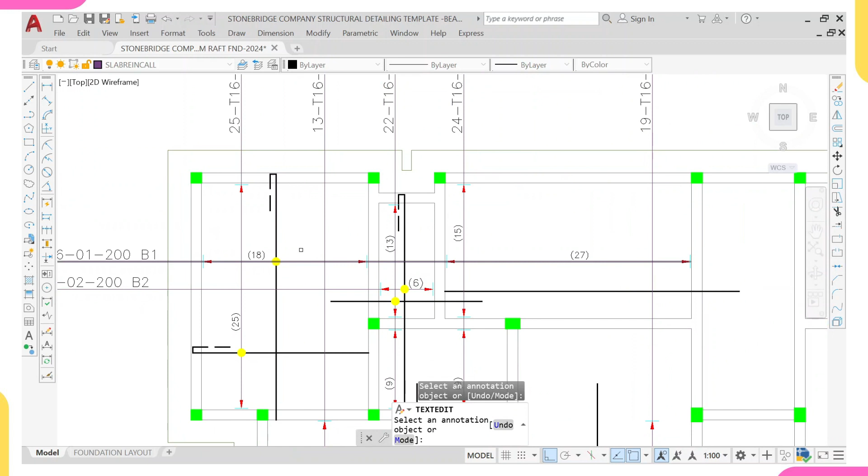Reason why we don't apply this in this one is because this is a two-way slab. Once it comes to a two-way slab, moment is acting on both S axis and Y axis. So moment is acting this side, moment is acting on this side, and also this side.

So you can call anyone B1 and you can call anyone B2, but it's advisable to call this shorter one B1 even though it's a two-way slab. You can call anyone B1 because it is still a two-way slab.

In one-way slab, we call the one along the shorter span B1 because it carries the main reinforcement. In this case, for the shorter span, this is my main reinforcement and this is my distribution bar. In a two-way slab, this is my main reinforcement and this is also my main reinforcement—both of them are main reinforcement.

So with this now, after I've explained, if you check, this is a one-way slab. Yes, this is a one-way slab. Let's check it so you can see it on your own. I'll come over and check it.

What is the dimension from this point to this point? I'm having it to be 5025. I'll also check from this point to this point—I'm having it to be 2000. So I'll come over to my calculator and do 5025 divided by 2000, giving me 2.5. That means it is a one-way slab.

So that means my member will be along here—this will be the bar that I will place here, while the horizontal one will be called my distribution bar.

So I'll click on this, do E, enter. Then I'll come over and do L, enter. So I'll draw from this point to this point. Yes, so this will be my member.

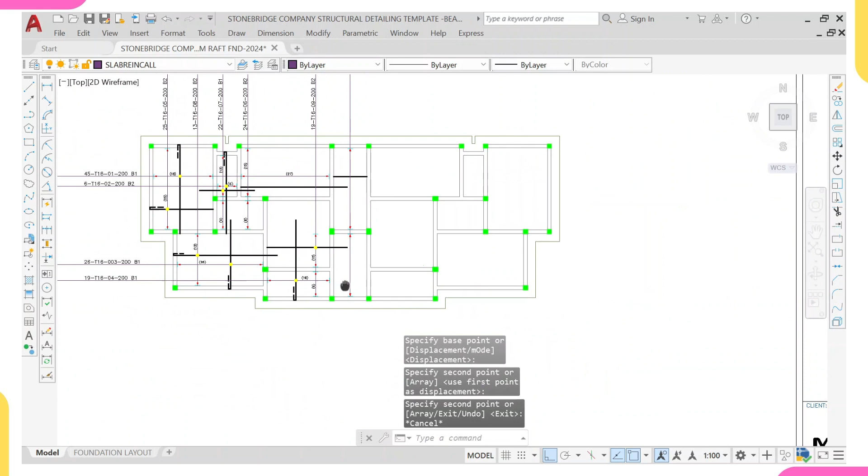Then I'll copy my indicator. I'll call this indicator, CO, enter. I'll copy my indicator from this point and come over to this point and place it here. Then once I've done this, I'll now copy this.

I'll come and copy with CO, enter. So I'll copy this from here. Then I'll come over and paste it. I'd like to paste it here and also at this point.

Then next is to check the number of rebar that will be running across this slab. So I'll come over to this point. I will check what is the dimension from this point to this point. I'm having it to be this.

I will right click again. What is the dimension from this point to this point? I'm having it to be this. So you can use your own calculator and check it on your own. So I will do 3,875 divided by 200, that's the spacing.

So I'm having 19.3, so it will automatically turn into 20. 19.3 is 20, sorry, is 20. So I will click on it, delete, and do 20. So this is what I'm having.

I'll come over to this one, 5,025. So I'll do 5,025 divided by 200, so I'm having 25.1, which will automatically turn into 26. 25.1, so it will now be 26... so this is what I'm having right now.

I will escape, so I don't need this again, and I don't need this again. I'll do E, enter—sorry, I'll do E, enter. So this is what I'm having right now. I'll come over to this point and call this out. I'll do CO, enter, copy from this point and paste it at this point. So this is what I'm having now.

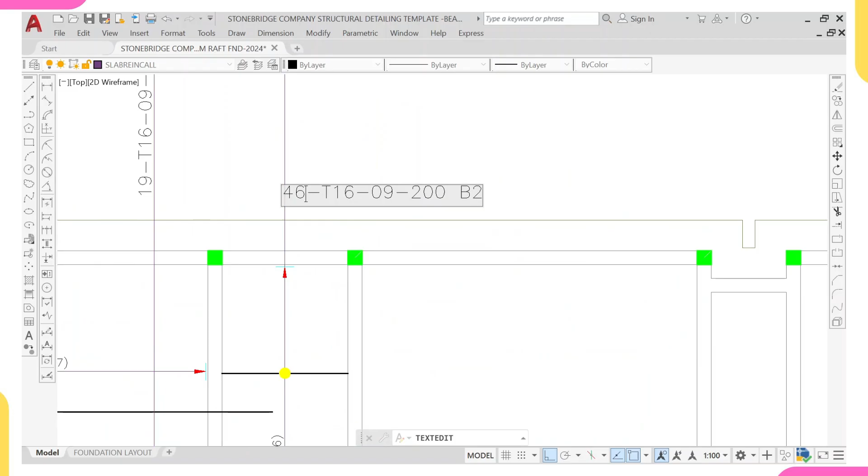Then I'll now provide a reinforcement that will run from this point to this point. So I'll do L, enter. I would like to check the dimension, what is the distance from here to here, because the normal length of our rebar is 12 meters.

So I'm having this to be 9.6. That's not up to 12 meters, the normal length of your rebar. Make sure this line is no more than 12 meters. But our advice is, since this is an African country where I'm located, their 12 meters might be 11.5 or even 10.5, so just take it as 10.5. Since this is still 9.6, it's okay for me, so I'll do L, enter.

So I would like my reinforcement to run from this point to this point. Sorry, I made a mistake, let me extend it. It should have been from here to this point.

Then I'll include my concrete cover of 35. I'll click enter, then come over to this point again and also include my concrete cover of 35. Click enter, escape, do L, enter.

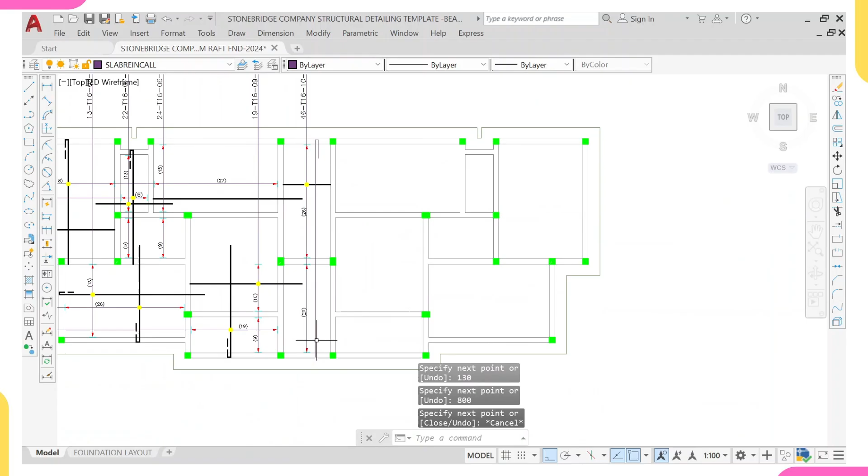So L, enter. Remember what we said, it is 130, enter, then 800, enter. That's our bottom bar. I can also come over to this place and do L, enter, and do the same thing: 130, enter, then 800, enter. So this is what I'm having right now.

Then I'll click on MA, enter, that's to match property. I'll match this property and scroll up and also match this property. Then I'll come to my top reinforcement and select one. I'll do MA, enter, match property with this, scroll down, then match property with this. So this is what I'm having right now.

I'll escape, then I'll call this out. I'll do L, enter, and call it out from this point. Let me take up, I'll call it out from this point. Yeah, it will go like this. So this is what I'll be having. I'll just drop it at this point, then escape.

So I'll offset it back, which is my concrete cover of 35, enter. Then I'll come and copy this, CO, enter. I'll copy it from this point, and come and paste it at this point.

Then I'll escape, and copy this one. I'll copy this, CO, enter, copy it from this point, and paste it at this point. I'll escape, do CO, enter, copy from this, copy this from here, and paste it at this point. So this is what I'm having right now.

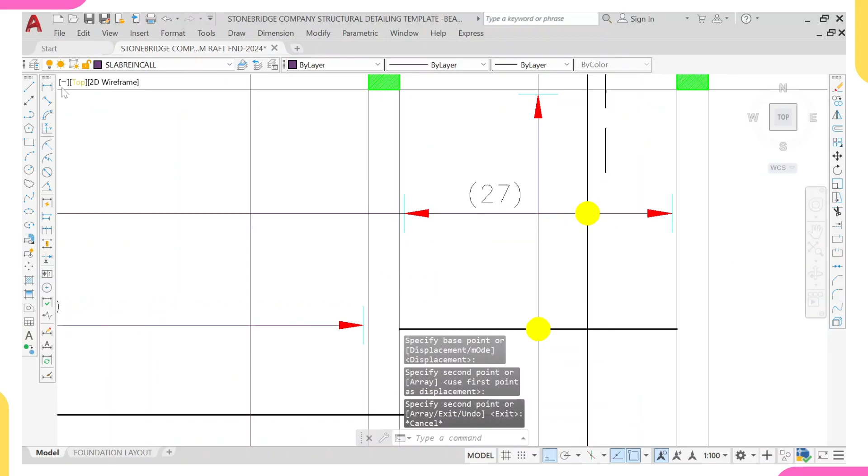Then I'll come and copy this, CO, enter. I'll copy this from this point, and place it at this point. So I'll now check the length from here to here, to know what is the length. I'm having it to be 1930. So 1930 divided by 200 gives 9.6. 9.6 will now turn into 10... actually I'm having 10. So this is what I'm having right now.

So I'll come and copy. This one, remember, will be my B2. I'll come and copy this, CO, enter, copy it from this point to this point. So this is what I'm having right now.

So I'll come and check, it is 10 in number. 10 in number, so my last one was 10, that's the last bar mark. I'll double click on this, I'll double click on this. So I'm having 10 numbers, T16, and the bar mark now will now be 11, Y, and this will now be B2.

Hey, I saw something right now. Yeah, we have been making a mistake. This should be T1, T1, T2, because this is foundation beam, this is foundation slab. And I've been saying B, B, B, B. From what we explained here, the moment is acting at the top because of the soil, so all these things I'm having as B1, B2, B3 should all be T. This is the mistake I've been making, and I forgot. But don't worry, I'll pause this video and change everything.

It's still the same way we did normal slab, that's also the same way we did foundation slab. It's just that your B's will now turn into T, while your T's will now turn into B. That's your top reinforcement in normal slab. Once it comes to foundation slab, it now turns into bottom reinforcement. Your bottom reinforcement in normal slab, once it comes to foundation slab, now turns into top reinforcement because of this moment I explained here. We have been making these mistakes since, so I'll pause the video and change everything to T.

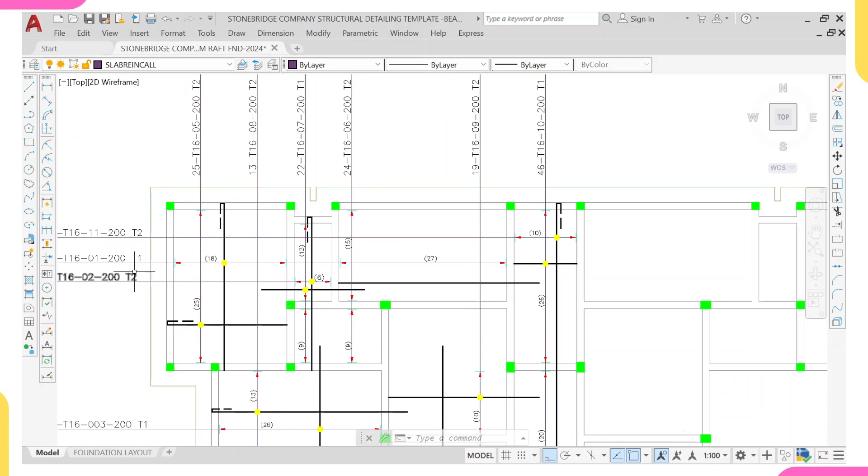So all this should be top reinforcement. In normal slab, whatever is your top reinforcement, once it comes over to foundation slab, it will become bottom reinforcement because of this thing I explained here. Yeah, it's just that I forgot.

Yeah, are you a civil engineer? Let me ask you a question.

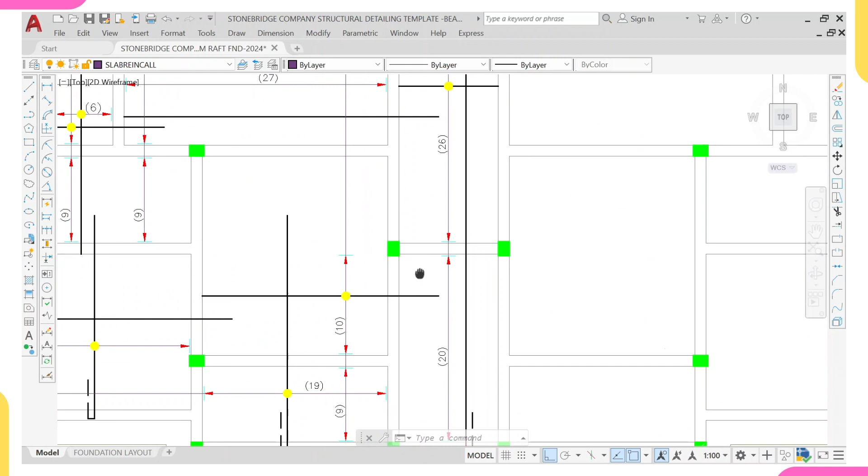Why do we say it's only anywhere we're having a continuous beam? Look at this beam now. The moment will start from this point and terminate here. So the moment here is 0, the moment here is 0.

But for continuous beam, let's use this as an example. The moment will go like this, it will sag, it will go up, hogging moment, it will sag, it will go up, hogging moment. So we provide top reinforcement to counter those hogging moments. Why in normal beams is there no hogging moment?

But in this case, since this is a foundation slab, it is called bottom reinforcement, not top reinforcement, because it is a foundation slab. So we'll be providing our bottom reinforcement.

So our bottom reinforcement will provide bottom reinforcement for this. This extreme one, this perimeter slab, we are not providing bottom reinforcement for them because this and this already have their bottom reinforcement. So we are not providing for perimeter beams, it's just only for these ones.

So we'll provide for this and this. I think for this one we will not provide because it's simply supported. Then in terms of horizontal, we'll provide for this and also for this. After providing for this too, we mirror everything that we have here to this, so we'll have a very good detailed slab.

So right now let's start. In providing bottom reinforcement for this, we'll come and check the length of our slab. I'll check what is the distance from this point to this point. I'll also right click again, linear. I'll check since I'm having this slab and this slab.

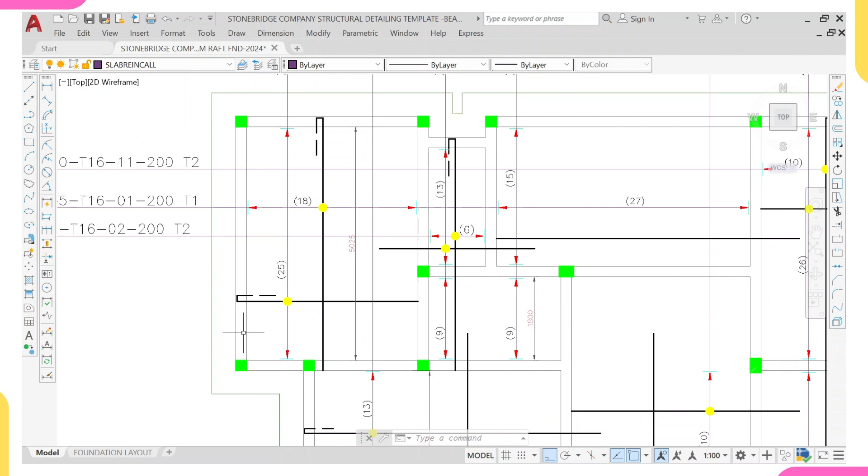But because of construction issues and to avoid confusion at site, we will just provide one reinforcement running from here to here, because if you tell them to provide a bottom reinforcement from here to here and then another from here to here, they might get confused. So to make the work seamless, we'll provide one bottom reinforcement running from here to here. That means we'll use the length of this slab to judge this, because if it passes here, it must surely pass here.

So let's check what will be the length of our bottom bar entering into this slab. I'll come over to my calculator and do 3225 times 0.25, so equal to... I'm having that the length that will enter here is 806, but I would not like to use 806, so I'll approximate it to 850. So I'll be having 850 entering here.

Then coming over to this one, let me erase, I'll do 5025 times 0.25, which will be giving me 1,256, but I'll just approximate this to 1300, or I can just approximate it to 1300.

Let me approximate it to 1300. So this is 850 and this is 1300. I'll minimize my calculator.

I'll do Line, enter, just to locate the center of this slab. So I'm having that from here to here is 1,300. I'll click enter.

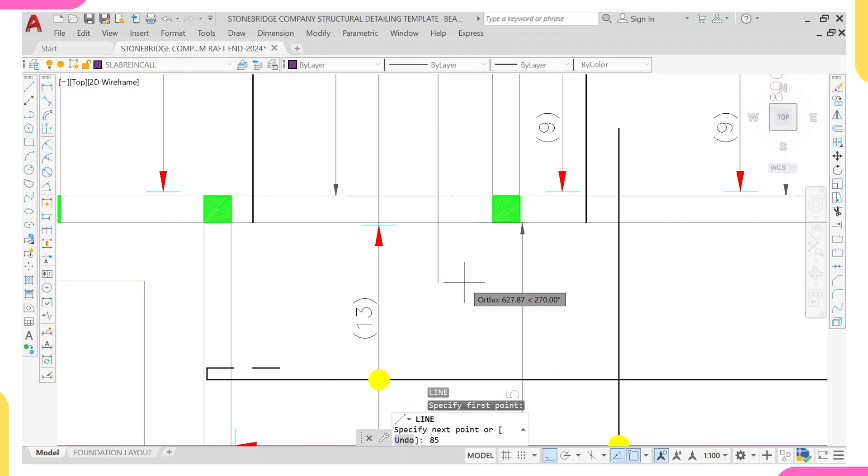I'll escape, do Line, enter, and I'm having that from here to here is 850. Enter. I'll highlight this and erase it, E, enter. Then I'll match property, because this is the top reinforcement and this is the bottom reinforcement. I'll click enter and match this property with this. So this is what I'm having right now.

Once you are through with this, you dimension it so those on site will know the dimension of this. So I'm having 1,300. I'll right click again and check from here to here. Then I'm having this, 850. Then I'll check where this is running from.

I'll do Line, enter. So it is running from this point to this point, to just this point, to this point. I'll extend this line outward, so I'll shift. But I would like to move this downwards a little bit, so it will be somewhere like here.

Okay, no, I would like to move it up again, sorry. Enter. I'd like to move it to, let me say, somewhere like this place. Yes, so I'm having something like this.

Then I'll copy my indicator. I'll just come and copy these two things, copy this and also copy this, and do CO, enter. So once I do CO, enter, I'll pick it from this point and come over to this point and press it here. So this is what I'm having right now.

I'll copy my indicator. I'll do CO, enter, copy my indicator from here, paste it at this point, then copy this number of bars, because this bar is from here to here, and this one we're having is also from here to here, so it's the same number of bars. I'll just copy it and paste it there, at this point. So this is what I'm having right now.

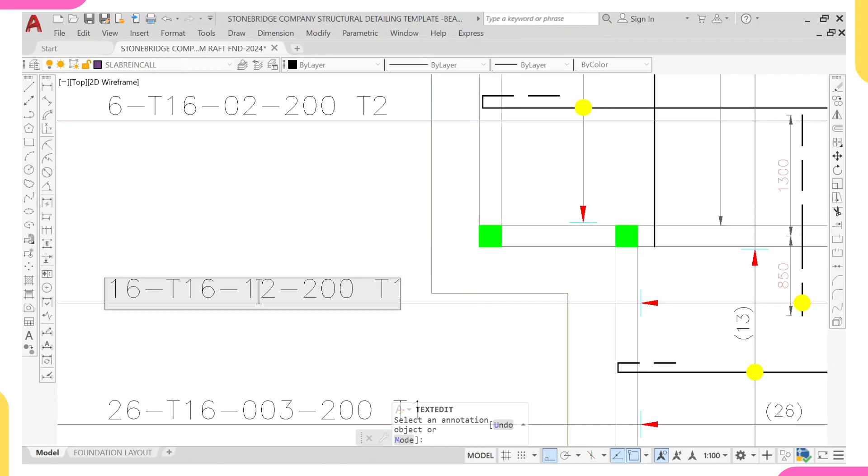This will be 16. We're having 16 numbers of bars, and the last bar mark that we did is 12, and also this is 200. Then this is B1, bottom reinforcement, not T again. In normal slab it is T, but in beam, and in raft foundation slab it is B, bottom reinforcement. So this is what I'm having right now.

So if you can see, we have done the bottom reinforcement for this. So I will pause this video and do the one for this, just following the exact thing that we mentioned.

Remember, this is a small area, so we'll be using the dimension of this larger one instead of the smaller one, because if it passes here, that means definitely it will pass here too. So I'll pause this video and do it immediately.

This is what we are having right now. We have provided a top reinforcement for this. So this is the top reinforcement running across this beam and also this beam, because there will be a moment here. So for that reason, we are providing this top reinforcement.

We are not providing this in a simply supported beam, because there is no moment across a simply supported beam. There's no hogging moment there. But this is a foundation beam, so it will be acting downwards.

That's the moment. So we have provided a bottom reinforcement for this. Now we'll go for the verticals. I'll provide a bottom reinforcement for this and also for this. Let's do this one, and then I'll pause the video and do the other.

First, I'll click on dimension to get the measurement from this point to this point. So I'm having it to be this. I'll right click again to repeat dimension. What is the dimension from this point to this point? This is my dimension.

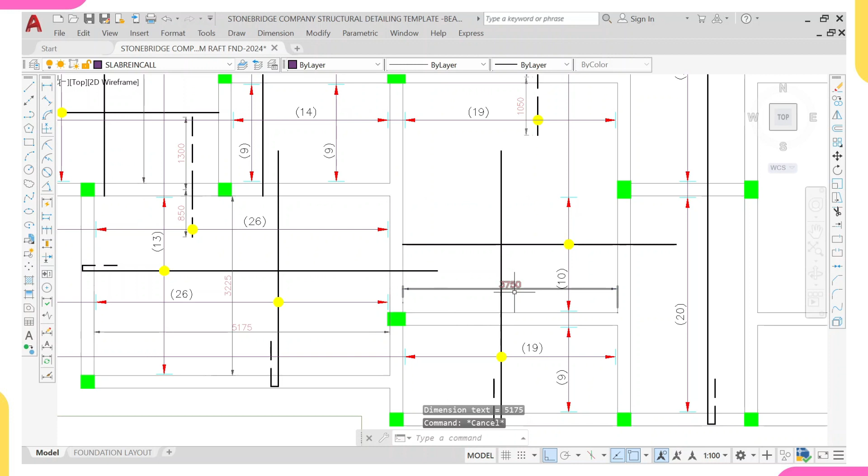Now I'll bring out my calculator and do 5175 times 0.25. So I'm having 1293. I'll convert it to 1300. In this case I'm having 3750 times 0.25, so I'm having 937.

I'll come back to this point from here to here, to locate the center. L, enter. For this side, I'm having it to be 1,000, that's 1 meter. Enter. Y, L, enter.

For this side, I'm having it to 1,300. Enter. Sorry, I made a mistake, let me do Control Z. I'm having it to be 1,300. Enter. So this is what I'm having right now.

Then I'll click on this dimension because I don't need it again. I forgot to delete this dimension, and I'll also click on this other dimension. E, enter, because I don't need them again.

Then I'll come and match property, my top reinforcement, MA. Enter. So I'll match this property to this one. So this is what I'm having right now.

I'd like to adjust on certain things. Yes, I'd like to adjust on certain things. So let me bring this down. Enter. I'd like to bring it down, let's say, to this point.

Yes, then I'll move this thing up. I want to make some certain adjustments so my drawing will look neat. So I'll move this thing up, enter. I'll move it from this point to, let's say, drop it at this point. Once I drop it here, I'm okay with it.

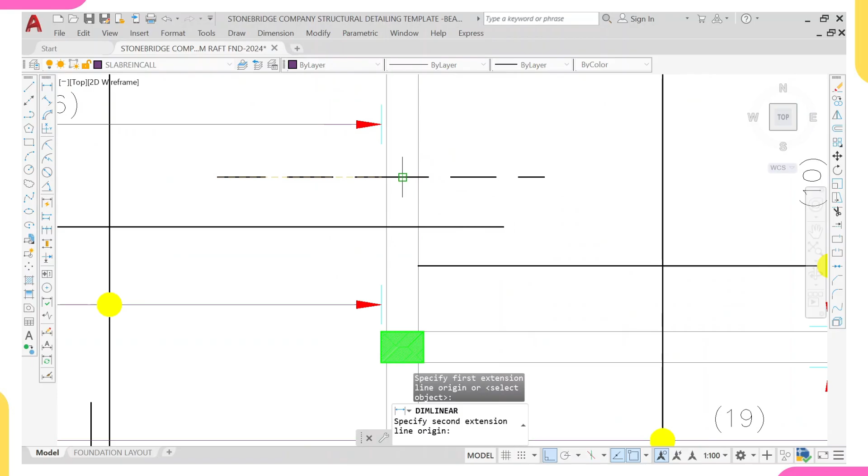Right now I'll come and click on dimension to dimension from this point to this point. I'm having this 1,300. Repeat my linear dimension again from this point to this point. So I'll be having this.

So I'll come over to indicate where my bar is running. It is running from this point upwards. Yes, I'm having this. So I'll escape.

I'll try to move it backward a little bit. Enter. I'll try to move it from here. I'll try to place it close to this, so it will be spaced out at this point. Once I'm having this, remember the concrete cover of 35, so I'll include it as 35.

Enter. Then I'll come over and copy this. CO, enter. I'll copy this from here and paste it at this point.

I'll also come over at this point and copy this double one, CO, enter. I'll copy from this point and paste it here. Then I'd also like to paste another one at this point, and delete this one, E, enter.

So I'm having, remember, look at it from here to here is the center. I'll just copy this, CO, enter, so I'll copy it. Sorry, I meant circle.

CO, enter. So I'll copy it from this point and paste it at this point. Then I'll come and copy this one too, look at it from here to here, it's something from here to here.

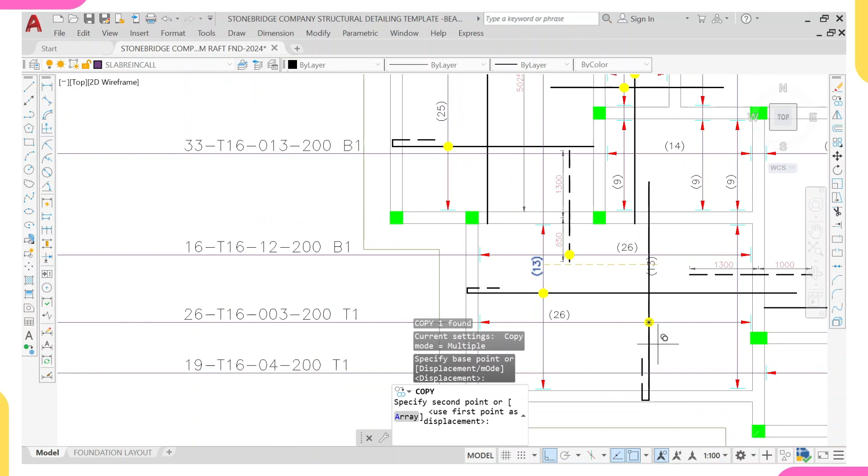CO, enter, so I'll also copy it too. Why am I doing circle? CO, enter, so I'll copy it from this point and try to paste it at this point. So this is what I'm having right now.

So I'll bring up my indicator. CO, enter, so I'll copy it from this point and paste it at this point. This is my indicator, so to indicate the number of total bars running, I'll come and copy this.

CO, enter. I'll copy from here and paste it here. So I'll come and check the total number of bars. 13 plus 9, that's 22.

So I'll double click on this. Yeah, I'm having it to be 22. This is 16. Let's check the bar number. This is the last one we did. It is 13. Yeah, so I'm having this one will not be 14.

This will not be 14. Remember, this will not be B1. But if it is a normal slab, if it's superstructure, it will not be T1. But for foundation, it will be B1. Yeah, I told you I made a mistake from beginning. So pardon me for that.

Yeah, so coming to this is what I'm having right now. So I'll pause this video and provide the top reinforcement for this, so that this video will not take long. And since I've done this, you should be able to get this.

Remember, I'll be using the length of this slab instead of using this smaller one, because so far it will pass here, that means it will pass here. So I'll be using the length of this slab and then of these two. So I'll pause and do this.

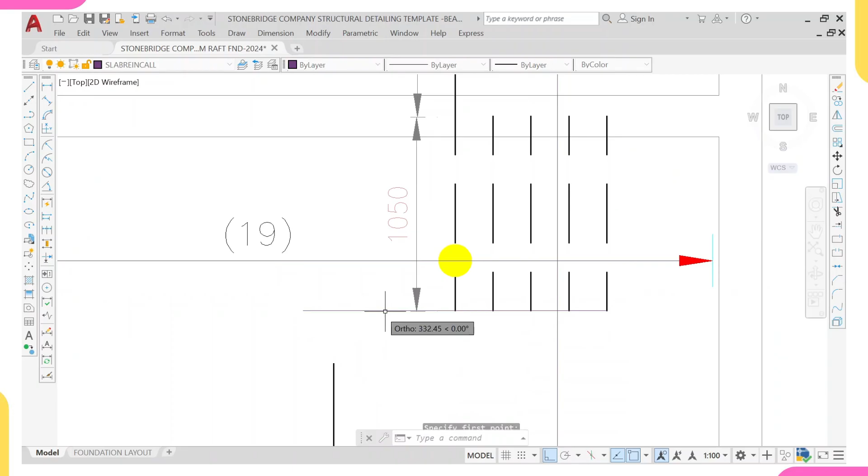MA, enter, so I'll match the property. So I'll do OFF, enter. So the spacing of 200, I'll click enter. Then there should be a distribution bar like this to hold it together. I don't know whether you understand. Yeah, there should be a distribution bar to hold this top reinforcement together.

So I'll do Control Z to undo all these things I've done here. So this is where I am right now. So that means I'll be providing a distribution bar. That distribution bar should be running from this point to this point, yes, because this bar will run from here to here. So that is my distribution bar.

I will do L, enter, so that my distribution bar should be from this point to this point. Yes, yeah, so I'll do MA, enter. I'll still match it because it's still a bottom reinforcement. I don't know whether you understand it.

My distribution bar should run from... because this reinforcement now is running from this point, look at it, it's running from this point, sorry, okay, look at it, it's running from this point to this point. So you can see it's running from here and stops here, then crosses this beam and continues, and then stops here. So this reinforcement now is running from here to here.

So this distribution bar will hold it together as it's running from here to here. That means this distribution bar is also running from here to here.

But if we make this distribution bar this lengthy, our drawing will not look beautiful, it will look messy. So for that reason, I'll be cutting this thing short. So I'll just put it that the distribution bar is just from here to here. This is just to indicate that this has a distribution bar.

So I'll leave this thing as my distribution bar. Right now I'll do L, enter, and trace this line outward from here. I'll escape - don't worry, I'll move it because it's touching this. I'll bring it to the other side.

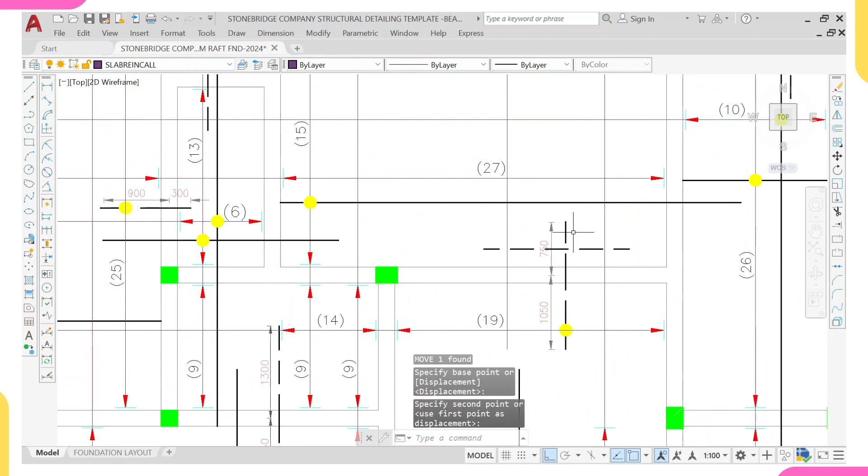I'll do M, enter, to bring it over to this side. Yes, I have to bring it over to this side. So this distribution bar, remember the length is from here to here. That's the length, but it is running from here to here.

I don't know whether you understand. The length of this distribution bar is from here to here, that's the length. Why is it running from here to here? Because you offset 200, offset 200, offset 200.

So right now I'll come and copy this, CO, enter. Then I'll copy it from this point and paste it at this point. I'll do R, enter to know where this one is stopping. So it's stopping here.

I'll also come and copy this, C, O, enter, copying it from here. I'll paste it at this point, then delete this thing. I did this so I'll know where this thing is stopping. E, enter. Hope you understand it.

So this distribution bar will run from this point to this point, but the length is from here to here, that's the length. So I'll come and copy this, do C, O, enter, copy it from this point and paste it at this point.

So I'll now check the length to know how many of this distribution bar there will be. I'll check from here to here - I'm having 1797. So 1797 divided by the spacing, the spacing is 200, so I'm having it to be 8.9.

That means 8.9, that means there will be 9 numbers of this reinforcement running from here to here. 8.9 convert it to 9, so there will be 9 numbers running from here to here. So I'm only having it as 9.

I'll come and copy this, my indicator, CO, enter. So I'll copy this indicator from here and paste it at this point. So this is what I'm having right now.

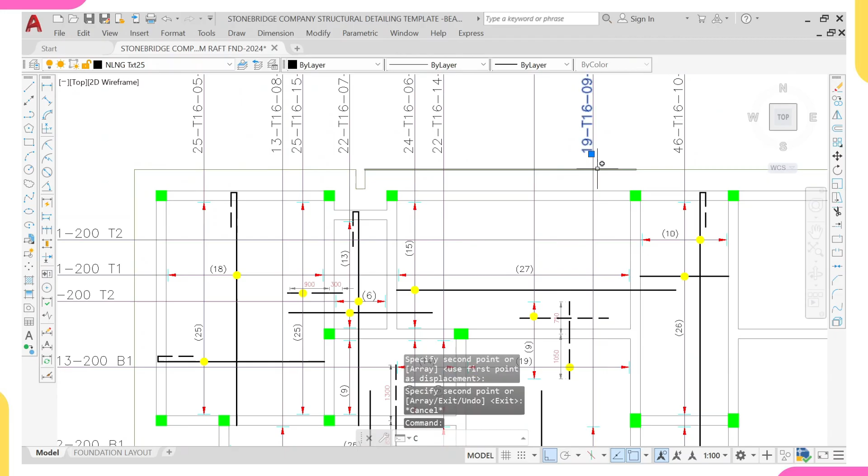Sorry, I don't get it well. I'll do Control Z, and paste it at this point. So this is what I'm having right now. Then I'll come and copy this, do C, O, enter, copy it from this point and also paste it at this point.

So right now I will now double click. Yeah, let me double click on it. Wait, let's wait for it. So it is now 9, not 19.

9, then this will be 17 - sorry, why 16? Sorry, then this will be 17, because the last one we did is 16. Why will this now be B2, B2, B2? You know, we have been doing B1. Yeah, this one is the distribution bar of this, so it will be B2.

So what I'll do now is come and copy this. Where is it again? Look at it. I'll come and copy this, do C, O, enter. I'll copy this and place it here, and change this.

I'll put a text here. So I'll delete everything and write: provide B2 for all B1. So this is what I'll write - provide B2 for all B1, because this is B2, so you should provide B2 for all B1.

So I'll leave this like this. With this now, I'm through. The next thing I'll be doing is mirror everything I'm having here to this side, or you can just write 'provide same reinforcement as this,' so that once they see it, they'll know you're having the same thing. Any of them - you can decide to mirror, or just write provide the same reinforcement.

Oh, I forgot, there's still one thing - we have not detailed this toe slab. Yes, we have not detailed this toe slab, but detailing is very easy. So let me just detail one.

So you see, let me just detail one. Remember, I'll do L, enter. There are two reinforcements running across this toe slab, like this. And I'll come and include my concrete cover for the toe slab. The concrete cover that we'll be using for the toe slab will be 50.

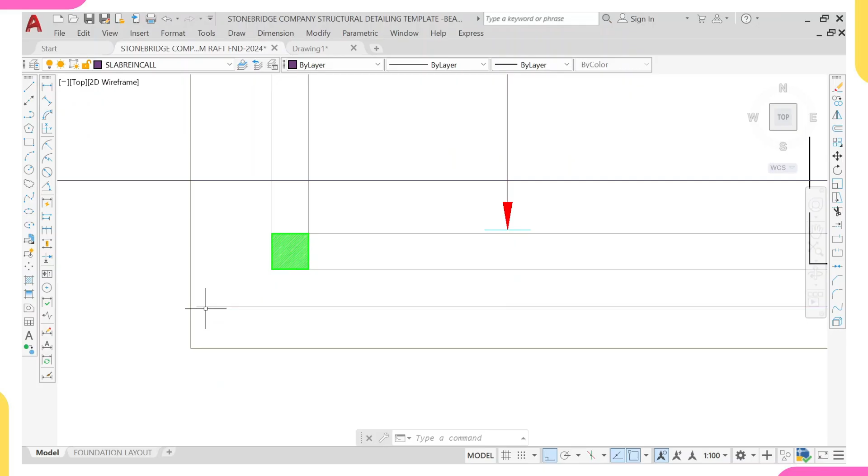So I'll not be including my sidebar. My sidebar will be seen because this is a sidebar. Look at, yeah, this is a sidebar. My sidebar will be seen if you see my detailing. Once it comes to my detailing, that's where you see my sidebar. So this is what I'm having right now.

Then I'll do L, enter, and also provide from here to here. Yes, this is what I'm having. I'll also include my concrete cover of 35. Enter. So this is what I'm having right now.

Then I'll come and match property. I'll do MA, enter. There, to match property. Remember, this slab now will provide for both the bottom and at the top. So I'll just do only for this, and on your own, you can do the remaining.

So what I'll do now is that I'll do L, enter to identify where it is running from. So I'll do from here to it's running across this.

Now I'll come and copy my indicator. Yes, I'll copy my indicator. CO, enter. I'll copy it. That is it. So remember, I'm trying to indicate where this one is running. So I'll put it here. So this is running. Okay, since this thing is too big, I'll scale it down.

SC, enter. I'll locate the center. I'll scale it down by 0.7575. Yeah, because it's too big, so it will be smaller.

So this one, it is running from. I'll come and copy this. Yes, I'll copy this. CO, enter. I'll copy this from this point and I'll come and paste it at.

Hey, I could have wait. Let me copy it again. So I'll come and copy this. CO, enter. Then I'll copy it from this point and then I'll come and paste it at this point.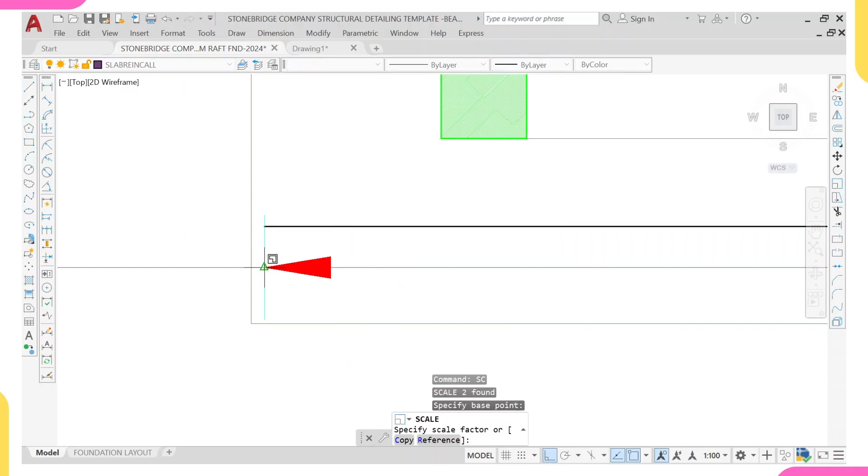So if you see, it's still too big, so I'll scale it down. I'll do SC, enter. I'll locate my base point, which should be here, 0.75, enter. So this is what I'm having. I've scaled it down, so I'll come and copy this one too.

Yeah, I'll come and copy this. I'll do CO, enter. Then I'll copy this from here. I will not be offsetting from here, because this one is touching our beam directly, so I'll not offset anything from here. So this I'm having, I'll paste it here.

Then I'll scale it down. SC, enter. I'll come from here, I'll locate 0.75. So enter. So this is what I'm having right now.

So this beam is running from here to here. So there's no space to include the number of bars, so I'll just give that number of bars. CO, enter. So I'll copy it from this point and I'll paste it here.

Then what I'll do is that I'll change this. Okay, I can just decide to do the number of bars. Okay, let me escape. Let's just check the number of bars, so they will know aside. Let's check the number of bars from here to this point.

So I'm having it to be 5865. So you do 5865 divided by 200, so you'll be having 29.33. So it automatically turns into 30. So remember, it automatically turns into 30.

So I'll double click on this. Yeah, I'll double click on this. I'll delete, undo, and put 30.

T16. Then this will now be 18. The last one is 17, so this will now be 18. So 200. I will not remove whether it is T1 or T2, because this one will be both T1 and it will be both T2. It will be seen in my section. So I will not escape, though this one I'm having right now.

Then I'll do another one. I'll come and do L, enter. Enter, that's from here to here. Remember, this call out line is for this.

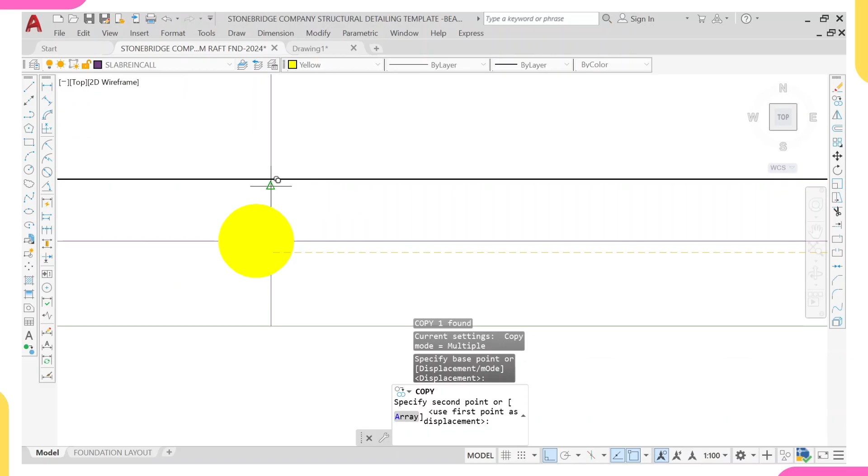I'll do CO, enter, I'll copy it from here. I made a mistake, I did not copy it at the center. Let me just paste it at this point. Yeah, so this is what I'm having right now.

Okay, let me now move it. Enter, so I'll move it and place it at the center. Yeah, so this is what I'm having right now. So I'll still offset my concrete cover of, what, 35.

This is it. I'll come and copy this indicator. I'll do CO, enter, copy this indicator from here and paste it here. Remember, I'll scale this down by 0.7, not 0.75. I'll do SC, enter, then scale down by 0.7. Enter, then I'll also scale this one down. SC, enter, scale down by 0.7. Enter. So it will be small.

Hey, I didn't specify the base point. That's the mistake I made, so I'll do Ctrl Z. I didn't specify the base point. So I'll do again, SC, enter. This will be my base point, 0.7. Enter. So this is what I'm having right now.

Then I'll come and copy another one, which is this. I'll copy it, CO, enter, copy it from here and paste it at this point. Yes, and I will still scale it down. SC, enter, locate the base point, which is this, then 0.7, enter. So this is what I'm having now.

I want to do L, enter. Remember, I'm trying to call out this. I don't want to have any text beneath here. I want to have my text here and on top, and also at this side. I don't want any text beneath here, so that's why I'm trying to call it out here. I'll be having this thing at this point, and then I will call it out.

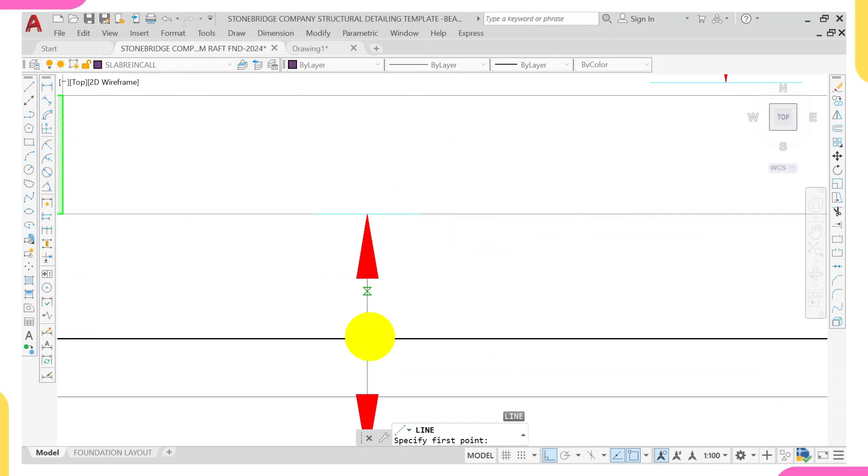Only initially, there's no space. Since there's no space, I'll do L, enter. I'll from here, come down a little bit, yes, and then take it right, since there is no space. Then I will copy this, do CO, enter. Yes, I will bring it down to this point.

So let's go and check the number. We'll come and click on dimension. From this point to this point, I'm having 465. So 465 divided by 200, I'm having 2.3, 2.3. It will automatically turn into 3. Yeah, 2.3 will now change to 3. So I'll do 3. Then this will now be 19, 19, and this will still be 200. So this is what I'm having right now.

After doing everything, you now mirror it to this point, and then also do your whole toe slab. Yes, on your own, you can mirror it to this point and also do your whole toe slab. Or should we mirror it? Okay, let's mirror this thing. So you see how to mirror it.

So you come and select everything, one of everything that you used. I use this, I also use this, I use this, I use this. I'll select my call out. Just select one of all the things that you know that you used. See my dimension, see this, then I'll come over and select this. I think I've selected one of everything that I know I used. I'll come and select this whole thing here, and also select this whole thing here. Then I will now select this whole thing. So I think I've selected one of everything other than it.

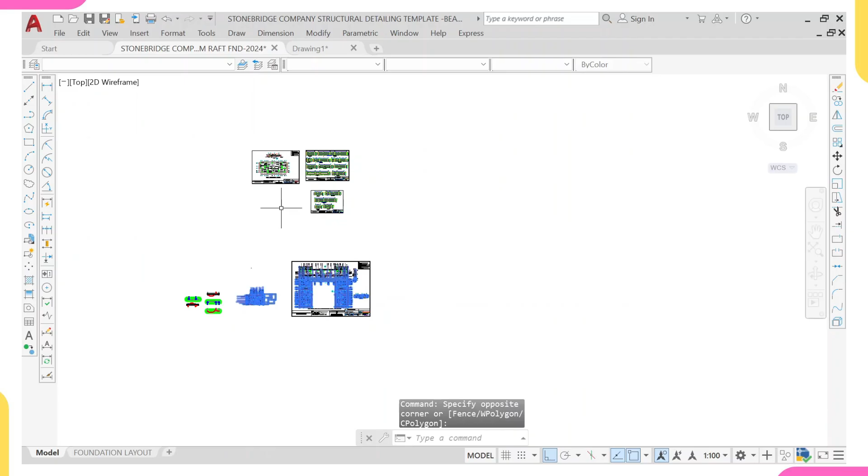Come again, hold your shift key, deselect everything, and then zoom down to Stonebridge detailing template. Hold your shift key, deselect everything here. You now zoom out again, coming over to this point. So if you see, everything has been selected. Yes, these ones too are also selected. So you can still hold your shift key and deselect everything here. This one too, they are still selected. You can still hold your shift key and deselect them, yes, and deselect them.

So if you see, everything that we need has been selected. I'll just mirror it. Even these ones are selected, so you can equally leave it. I'll still mirror it, so you now type MI, which stands for mirror, enter.

Remember, this is our structure. If you want to locate the center, you can either use this line, but I'll advise you to use this beam line, because this is the staircase, and this part is a mirror of this part. So this staircase is just like the center line of this whole structure.

So I'll come and locate the center of this, I'll come and locate the center from this. I think this is the center. Yeah, when we are doing this, we use the center. I'll just try and locate the whole center. Let's see.

So this is the center. Anywhere you are seeing a triangle, triangle means center. Center of any line is triangle. For example, let me show you. If you see here, it will not give me a triangle because this is not the center of this line. But if I look here, it's also not giving me a triangle because this is not the center of this line. But if it is the center, it will give you a triangle. So this is my center.

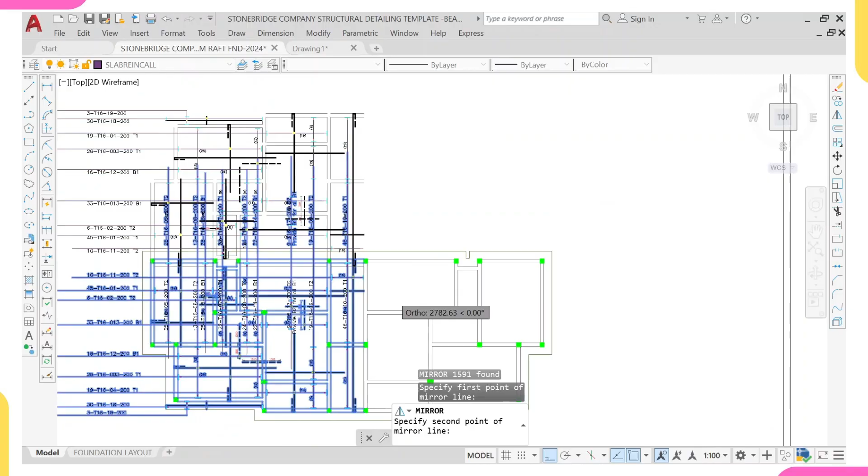I'll click on this. Once I click on this, I'll make sure your ortho key is turned on. So I will come like this, look at it, and I'll place it. I'll make sure I have a straight line, so I'll place it here. Then come and click on no - don't erase the source object. So if you see, this is what I'm having right now.

I've successfully mirrored it, but if you see these ones too, they are mirrored - I mistakenly selected it. So what I'll do now is delete it. I'll be deleting all these ones, because they are mirrored too. It's a mistake, I forgot to remove it. So I'll pause this video and just delete them, only this, because all the others that are mirrored are correct.

So after this, now we'll do the sectioning of this drawing, and we'll be through. So I'll just pause this video and delete all this. So I've deleted it, and if you can see, it is now one reinforcement.

So the next thing is to cut the sectioning. If you watched our beam layout, if you have not watched it, please go and watch it, where we did the beam layout of this - you'll see that we have a similar reinforcement with this. I'll come and use their sectioning. I could have done it from the beginning, but I'll show you and tell you the reason why I'm using this sectioning.

I'll do C, O, enter. So I'll copy this from here, and I'll remove my auto click. And I'll like to place it at this point. After placing, I'll explain what I want to explain before I now move it to where it will be. So this is how it will look like, this is how your section will look like.

This beam will be like this, but on your own, this will be having two here - this and this. You delete this. Okay, this is our own, so I'll delete this and also delete this.

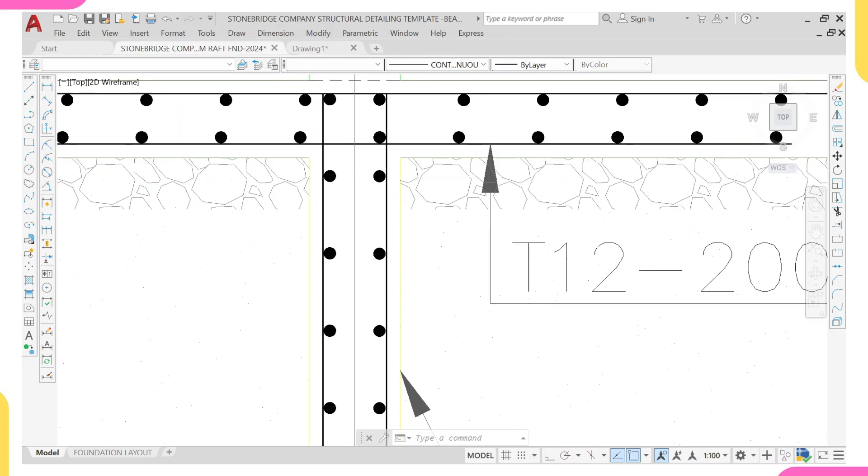Yes, and also I'll come and delete this and also delete this. I want to use their own, but as for me, it's not the same thing. I could have started from the beginning, but since it is the same thing, I just want to use theirs. I'll come and delete this, and also from here to here, I'll delete everything that I'm having here, and I'll also delete this center one. Yes, I'll also delete this, and then come over to this point and also delete this. Yes, I'll do E, enter.

So I've deleted everything. So what I'll do now is just come and copy this. I'll come and copy this and also copy this, do C O enter. Remember, on our own, we are having just two sidebars, that's why I deleted everything to just include only two. So I'm having only two sidebars - that's in our own, only two sidebars.

So from here again, and then I'm having another one. Let me say it's here. Also remember some of this will be deleted too. I'll leave it in two, because this is also a beam. There should even be a reinforcement here, and there should be a reinforcement at this side.

So what I'll do is come and delete everything like this. I'll come and delete everything, and also on this side I'll delete everything, because there should be a reinforcement on this side too. So I'll delete everything and do E, enter.

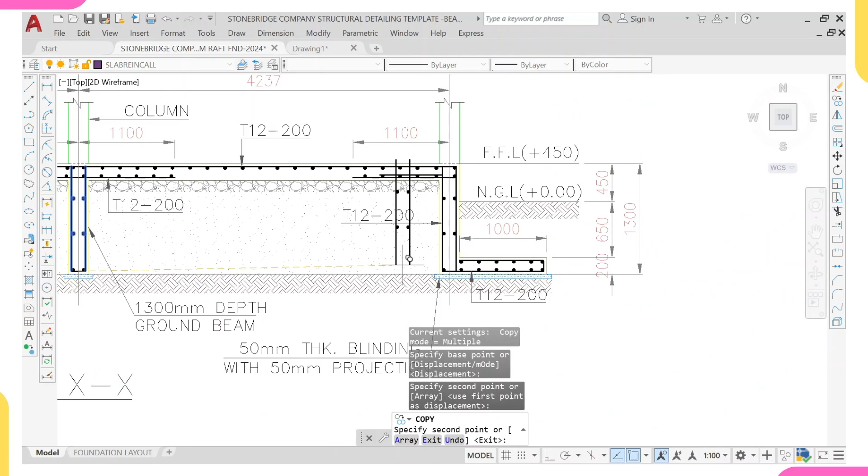So I'll come again and copy this, copy my reinforcement, copy my reinforcement, and also copy my reinforcement. Do CO, enter. I'll copy from this center line and paste it at this point. I'll also come again at this point and paste it at this point.

So this is what I'm having right now. Then this one I'll take backward because it should be stopping together with this. So I'm having it to be this. Let's just leave it like this. So this is what I'm having right now.

I'll just adjust only this side. So the depth that we had is 1,000 — that's 1 meter. So if you do 200, our depth of slab is 200, our toe depth is also 200. So that's 400, 1,000 minus 400, we're having 600. So I'll change this to 600. I'll click on end — sorry, I'll just click outside.

Then I'll change this to 500 because our own is also 500. So I'll change it to 500 because our own is 500. Yeah, I think we are to. Then using this now, you can adjust this, and also this we are having 200, 200. Then the depth is 1,300 — that's what they use, but our own we used 1,000. So I'm having this, yeah.

So with this now, let me show you the reason why I copied this section. It looks exactly like here across this my slab. For example, if you see, I'm having a small area, a beam, then this is the smallest area. Look at it, a beam, a small area. Then I'm having this big area, then look at another beam.

So I'm also having another big area. Look at it, beam, and also look at that big area, then beam. Then you now see my two slab. So the reason why I copied that section is because if I cut it across here, it will look exactly like this. So what I'll do now is come.

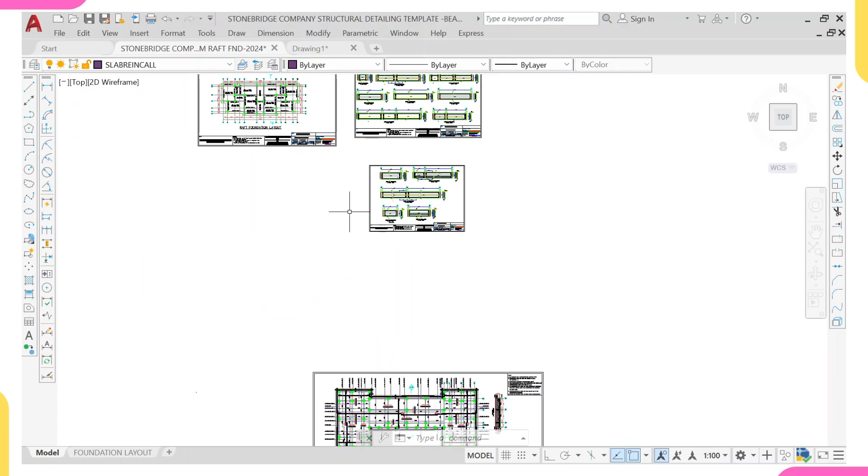Okay, our own will not use grid, but you can come — I can come and shape from here. I can come from here because if you watched the video that we did, you see that we copied this one too. So it's exactly the same thing. So look at it.

So I'll just come and change my own too. So I'll double click on this G. Yes, I'm having it to be G, E, after E I'm having C, then A. So this is what I'm having.

Then you can equally change the dimensions because in this one I also changed the dimensions. So you can equally change the dimension, you can just adjust it. But after, I'll come and copy this. This one we did in our last video. I'll come and copy this. In case you have not watched it, you can equally go and watch it.

CO, enter. I can copy it from — let me say I'll copy from this staircase. So I'll copy it from this staircase and then come over to this point and paste it here. Yes, I'll paste it here. So this is it now, this is the section. But it's directly on this, so what I will do now is adjust it a little bit. I'll move — okay, let me just scale it down.

Let's scale it down by 0.75. Enter. So it's better now. Let me just scale it down, and now I'll move it. I'll also select this one because I like to move both of them together.

So I'll now do enter, and move it from this point, dropping it here. At this point I'll copy this and also move this upward, and drop it at this point.

So this is my sectioning. I can come over here, do enter, then copy this section and place it at the top here. Once you are through with everything, you now do XL, enter. XL is for construction line.

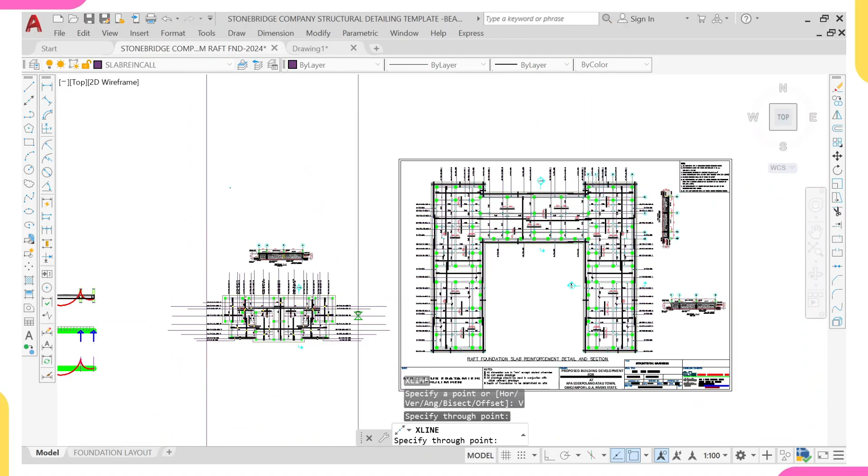I'll do V, enter, and come and place it at this point, and also place it at this point. Then I'll do another one, XL, enter, H, enter, and place it at this point.

I'll then do TR, enter. That's to trim. So I'll trim from this point to this point, and let's wait for it to trim.

Then I'll also trim this side, from this point again to this point. Let's wait for it to trim. And then I'll also trim from here to here.

So these are what I'm having right now. Then I'll escape, click on these lines and delete them because I don't need them again. E, enter. So this is what we are having right now.

So let me bring this drawing closer. Enter. I'll draw it closer and drop it here. So this is the section from here to here, and this is what you'll be seeing.

Remember, after on your own, you detail these two slabs very well. You detail it all, just what I have done here, you do it here. You also do it here. Just do it all, and then I'll come and copy this.

I'll come and copy this. Enter, copy it from this point, and I'll come and paste it at this point. Yes, this is what I'm having right now.

Then I would like to move this away, a little bit away. Enter. I'll drop it at this point. Then I'll copy this, and also move it from here. I'll do C, O, enter.

So I'll copy from the center, and then I would like to place it at the center of this, and I would like to scale it down by 0.55.

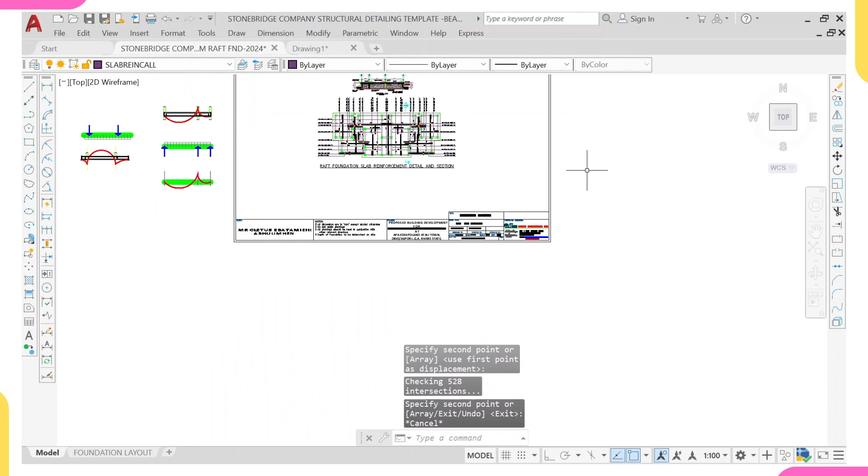So I'll do SC, enter, locate the base point. I'll choose here to be my base point, and scale it down by 0.55. I'll click on enter. So yeah, it matched. I'm accurate too.

So I would like to move it up a bit, enter. So this is what I'm having right now. So right now I'm through. I'm through with this detailing.

Hope you gained a lot from this, and hope you understand the reason why my bottom reinforcement in a normal slab, once it comes to foundation, became top reinforcement, because the soil is acting upward, causing this moment. In a normal slab, human load - that's live load and dead load - act downwards, causing this moment. But in terms of foundation, the soil is acting upward, and also this column is acting downwards, trying to transmit its load to the soil, and the soil is trying to resist it.